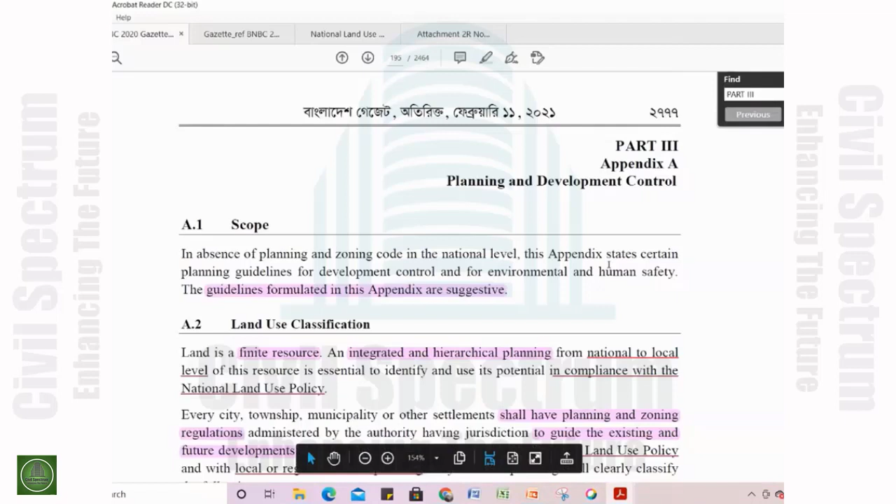So let's go for the discussion of each of the sections in detail. This is Part 3, Appendix A of BNBC 2020. We will be discussing planning and development control.

So the scope at the very beginning defines that there should have been a planning and zoning code. Since it is not there, in the absence of the planning and zoning code at national level, this appendix states certain planning guidelines for development control and for environment and human safety.

The guidelines formulated in this appendix are suggestive. So this is the building code, not a planning code.

If there had been a planning code here, probably this part would have been covered by the planning code. In absence of that, the BNBC suggests certain guidelines here.

So now about the land use classification. There are a few statements that are very important for a country like Bangladesh. It's quite a populous country with limited resources. So land is one of the resources, and at the very beginning we declared that this is a finite resource. So an integrated and hierarchical planning from national to local level of this resource is essential to identify and use its potential in compliance with the national land use policy.

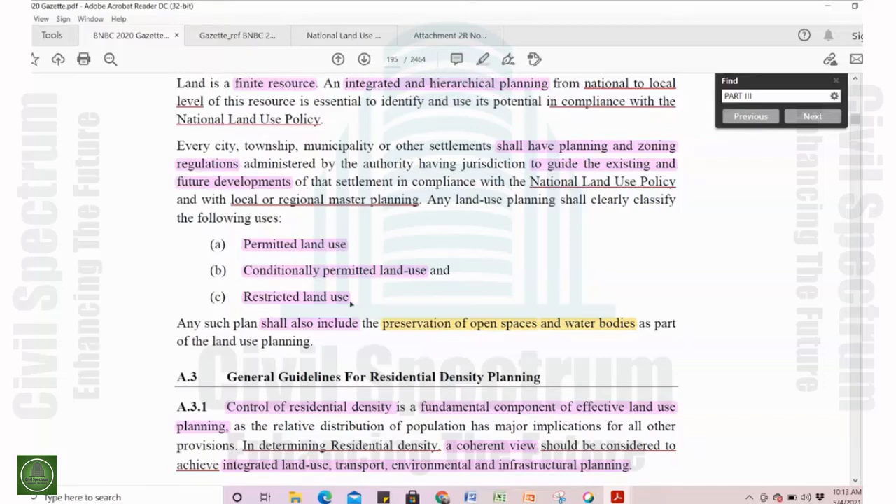But all these land use planning shall clearly classify the following uses. So there are three types of uses which are required to be mentioned in the planning guidelines. One is permitted land use, the second one is conditionally permitted land use, and the third one is restricted land use. But that's not all.

Any such plan shall also include the preservation of open space and water bodies. So this is an additional criteria that must be met in any land use planning. So this is the basic part of land use classification.

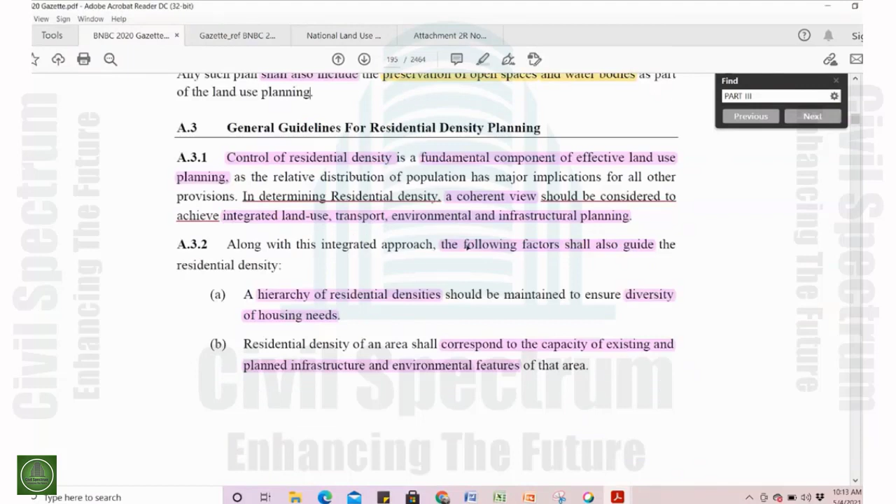Then we go for the general guidelines for residential density planning. Control of residential density is a fundamental component of effective land use, because the relative distribution of population has major implication for all other provisions. So in determining residential density, a coherent view should be considered to achieve integrated land use, transport, environmental and infrastructure planning.

So there must be an integrated approach which will create a balance between transport, environment, infrastructure planning, and residential densities. Along with this integrated approach, the following factors shall also guide the residential density.

A hierarchy of residential densities should be maintained to ensure diversity of housing needs. I have highlighted a few words just to focus our points actually, that we need diversity of housing needs, and to ensure that, we need to distribute residential densities in hierarchies. So these two factors have been highlighted here.

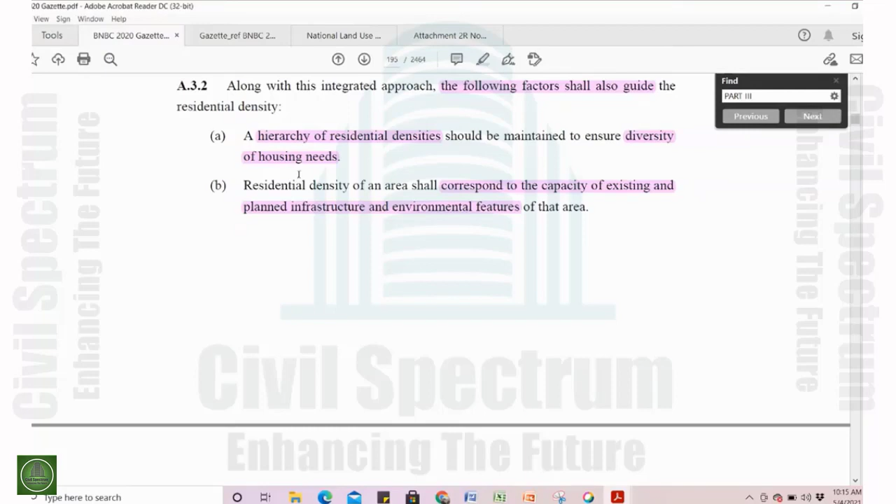Likewise, B: residential density of an area shall correspond to the capacity of existing and planned infrastructure and environmental features. So there are two issues: one is existing and planned infrastructure, and the environmental features of a locality. So residential density shall correspond to that.

C: densities should be planned in such a way that encourages public transport and reduces travel demands. These are basic guidelines for all residential densities.

For large cities, higher densities around stations and interchanges of rail-based public transport systems may be encouraged to reduce reliance on road-based public transport systems. Since higher density residential development near high capacity transport systems creates pressure on urban land use planning, careful environmental planning with definitive environmental objectives shall be there for such instances.

To protect environmentally sensitive areas and areas of historical importance, low density residential development should be proposed where and as necessary. So there is an indication of density distribution: where the higher densities will be and where the lower densities will be.

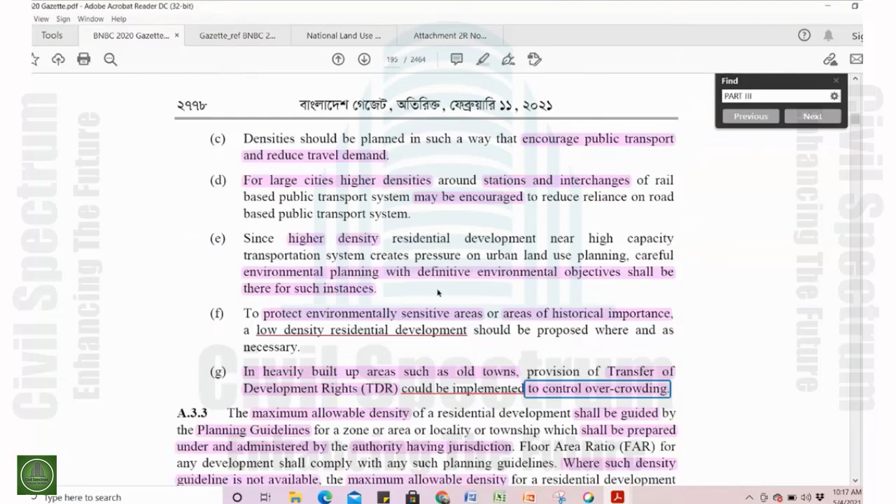In heavily built up areas such as old towns, provisions of transfer of development rights (TDR) could be implemented to control overcrowding. So these are the general guidelines for distributing residential densities, and there is just another guideline for it.

The maximum allowable density of a residential development shall be guided by the planning guidelines for a zone or area or locality or township, which shall be prepared under and administered by the authority having jurisdiction. So actually it is the authority having jurisdiction who will decide what will be the maximum allowable density for a locality, zone, area or township.

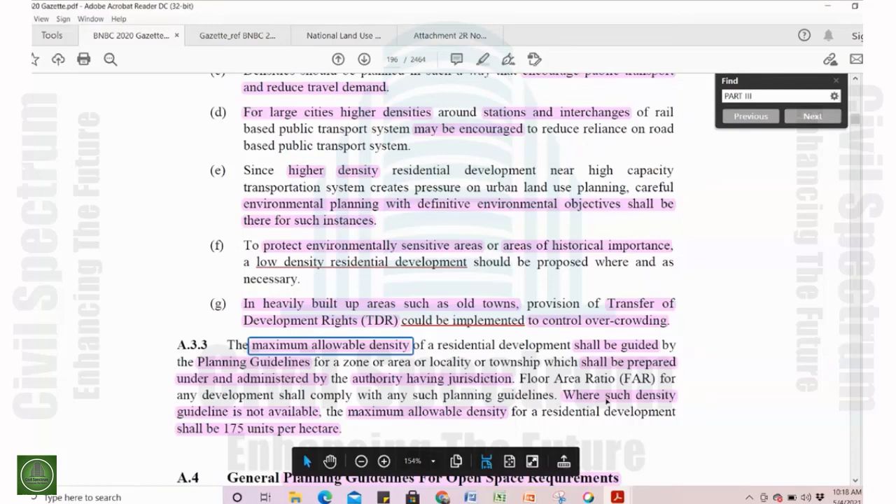Floor area ratio (FAR) for any development shall comply with any such planning guidelines. Where such density guidelines are not available, maximum allowable density for a residential development shall be 175 units per hectare. So there is a baseline: if we don't have any other guideline present for referring to that development, we will consider this density guideline as a reference for our development.

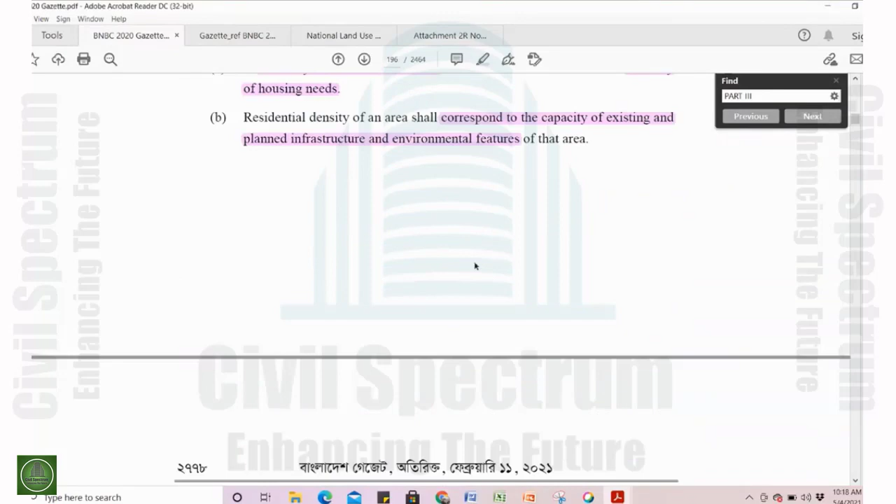As we all know, these are the density distribution guidelines for residential densities. Now comes the open space guidelines, general guidelines for planning open spaces. I think the whole paragraph makes sense, so I'll go line by line for this part.

In a high density context like ours, pressure on land is extreme. Preserving open spaces and maintaining environmental balance becomes a priority in this context. In any planning process, open space must be planned as a land use in its own right.

Although apparently open space is not a kind of dedicated, defined land use, it is stated here that open space must be planned as a land use, and not as the remainder after providing for other land uses. So it has to be a focus of the planner while planning the settlement, an area, or a master plan.

The hierarchy of recreational open spaces in planning settlements may be as following. So there are three types of open spaces: local open space, ward open space, and regional open space.

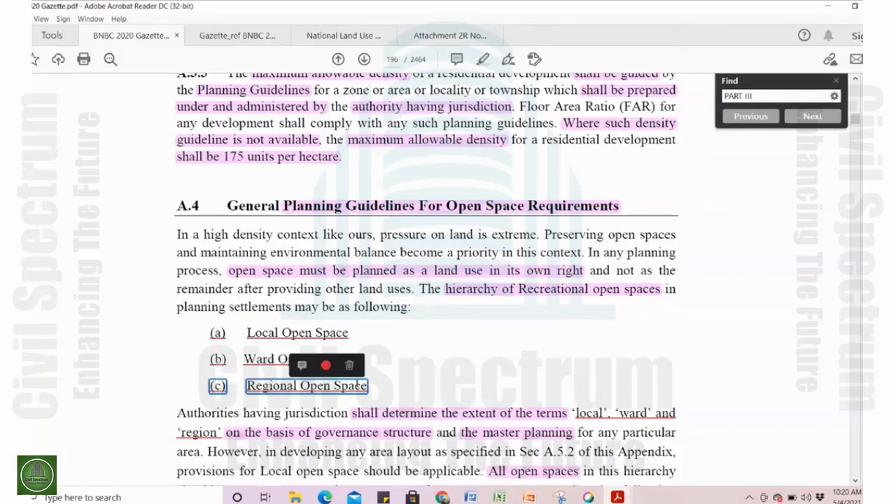Authorities having jurisdiction shall determine the extent of the terms local, ward, and region. So these are a bit flexible. The authority will define which area should be designated as local, ward, or region, but it is not totally free—they will do it on the basis of governance structure and master planning for any particular area. So there are references on the basis of which they define the extent of a locality, ward, and region.

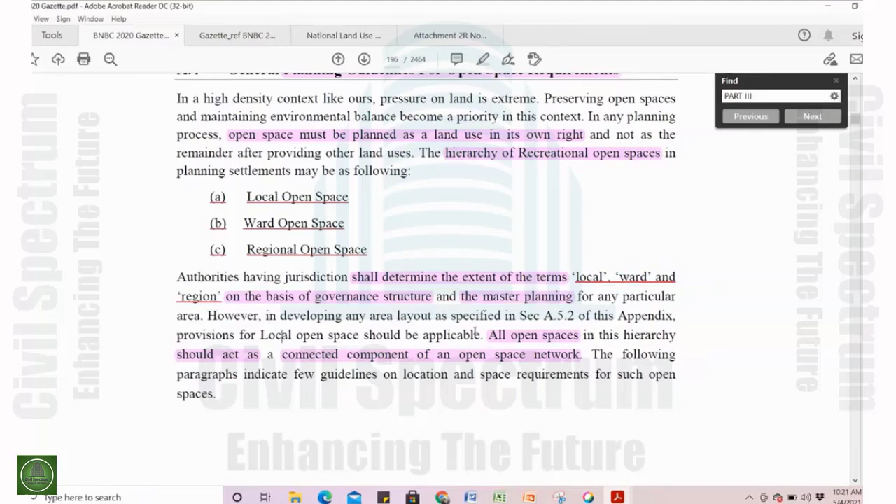All open spaces in this hierarchy should act as a connected component of an open space network. So they are not independent and disjointed; they must be planned in a way so that they are also part of an open space network. That is another guideline for open space requirements.

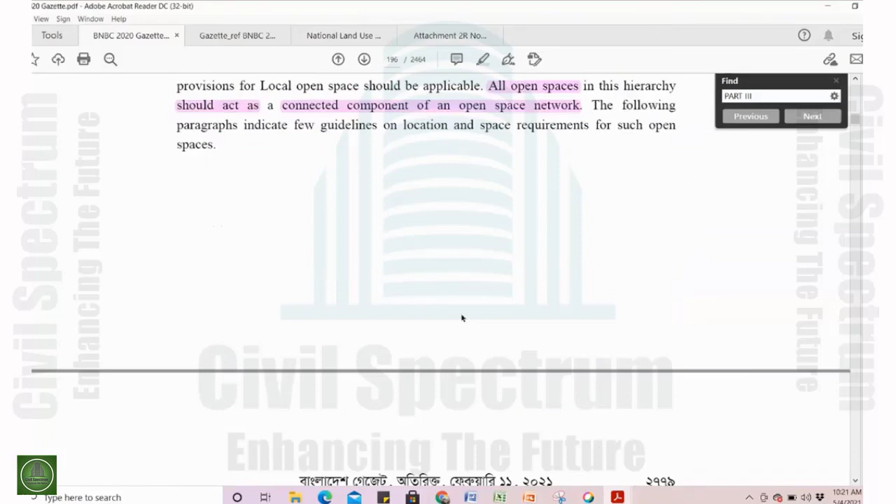So let's go into detail for each of the open spaces. For local open space, every locality should have local open space, which is required to meet primarily the passive recreational needs like outdoor sitting, jogging, walking tracks, playgrounds for children, etc. These are all passive recreational needs of the population.

Such spaces should be located either within the residential neighborhood or somewhere centrally to serve a wider area of more than one neighborhood. So we can understand they are relatively smaller in scale, located within the locality, and there are a few guidelines about the space requirements here.

Considering the projected future population of a locality—we must notice it is the projected future population, not the existing population—a minimum requirement of 1 square meter of local open space per locality occupant should be allotted.

So this is the basic guideline for a new development. This has to be followed, but where it is already a built-up situation, if possible, such open spaces should be at least 500 square meters. So even in newer localities, it can be a parcel of 500 square meters, or multiple parcels of 500 square meters. It is suggested that it should be at least 500 square meters or more.

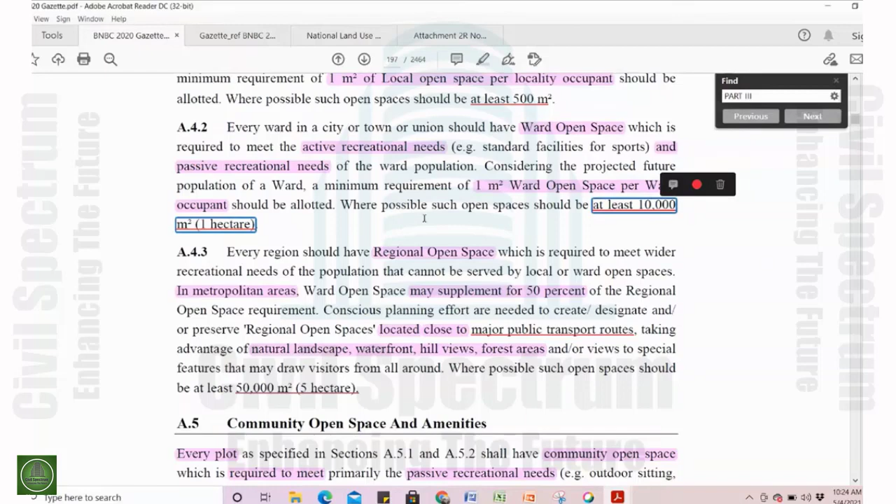It is 1 square meter of ward open space per ward occupant, and the minimum size here is 10,000 square meters, or 1 hectare—that is the minimum size for ward open space.

And for regional open space, every region should have regional open space, which is required to meet wider recreational needs of the population that cannot be served by local or ward open spaces. In metropolitan areas, ward open spaces may supplement 50% of the regional open space requirement. So it is a flexibility and exception that in metropolitan areas, ward open space and regional open space may overlap.

They can supplement each other.

Conscious planning efforts are needed to create, designate, and preserve regional open spaces located close to major public transport routes, so that the majority of the population can have good access to regional open spaces. These spaces should take advantage of natural landscape, waterfront, hill view, forest areas, or views to special features that may draw visitors from all around.

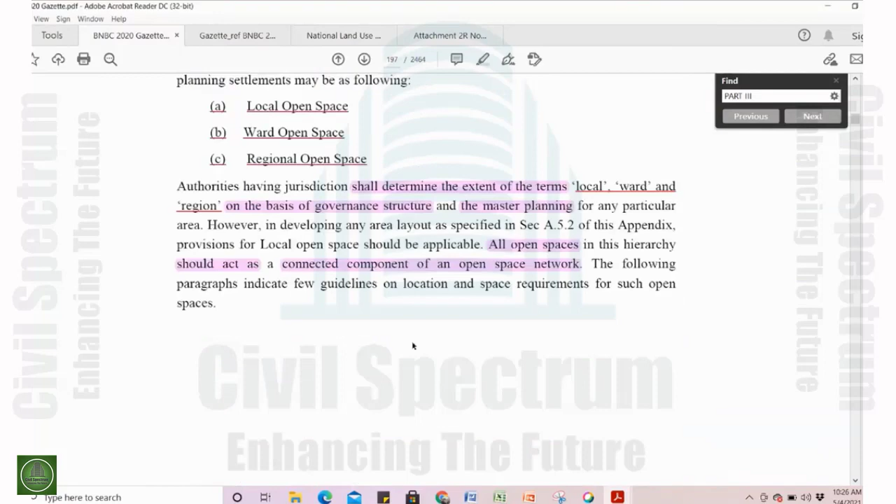They also serve recreational purposes of a different kind, not served by the local open space or ward open space. Where possible, such open spaces should be at least 50,000 square meters, or 5 hectares. This is the minimum size, of course, so it can be much larger. These are the 3 types of open spaces which should be placed in a hierarchy for a larger planning scenario.

Now comes the open space criteria within a plot: community open space and amenities. Every plot, as specified in sections A5.1 and A5.2, shall have community open spaces required to meet primarily the passive recreational needs - outdoor sitting, jogging, walking tracks, playgrounds for children. Such spaces shall be located within the plot boundary. This is about each individual plot development. Considering the types of development, the following minimum requirements of community open space and amenities shall be applicable as per guidelines of these sections.

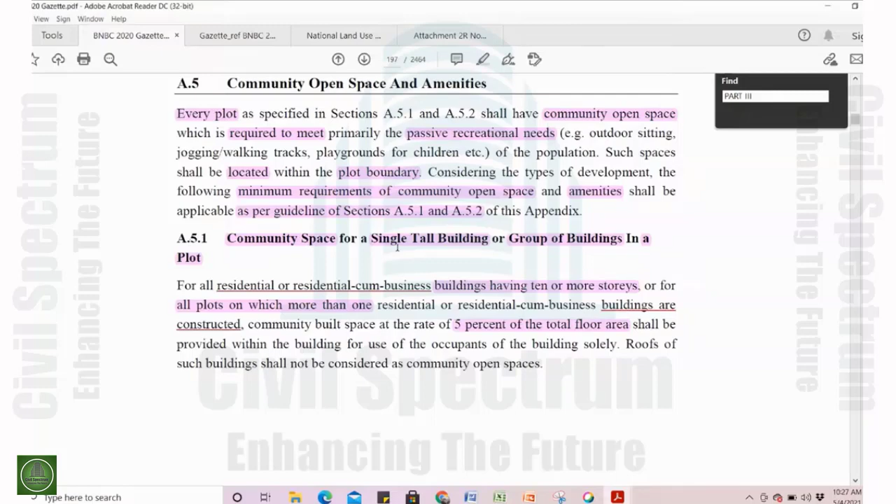Let's go through the sections. A.5.1: community space for a single tall building or group of buildings in a plot. For all residential or residential-cum-business buildings having 10 or more stories, or for all plots on which more than one residential or residential-cum-business building is constructed, community built space at the rate of 5% of the total floor area shall be provided within the building for use of the occupants of the building solely. Roofs of such buildings shall not be considered as community open space.

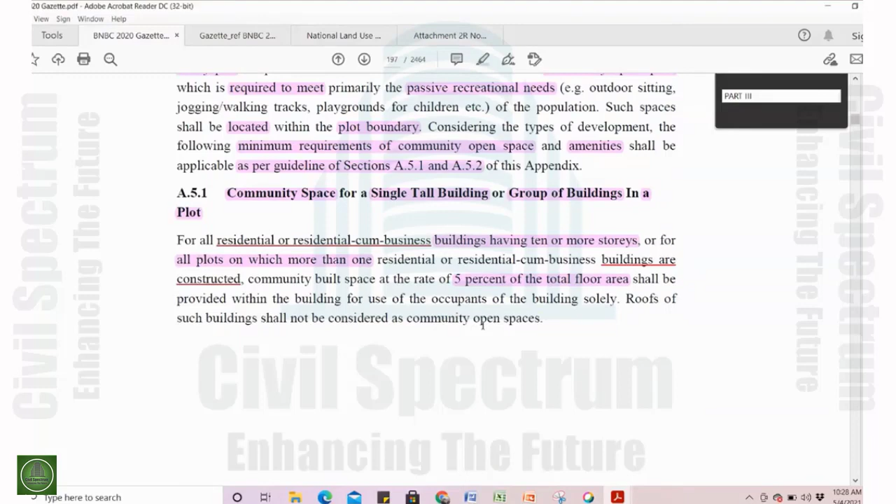So this is mostly focusing on a plot and tall building, or relatively higher density development or mixed use development. That is the guideline for the community open space for such developments.

For residential or residential-cum-business plots measuring more than 0.1 hectare - these are relatively larger plots - 10% of the area of land or 1 square meter per occupant of the plot, whichever is larger, shall be left vacant for use as a children's playground. This playground shall be contiguous and shall have a length not exceeding 2.5 times its width. The playground may extend into the mandatory open space of the lot.

So relatively larger plots will have a different guideline for community open space, guided by two criteria: 10% of the area of the land, or 1 square meter per occupant, whichever is larger, will be needed for community open space. This particular open space can overlap with the mandatory open space or setback areas.

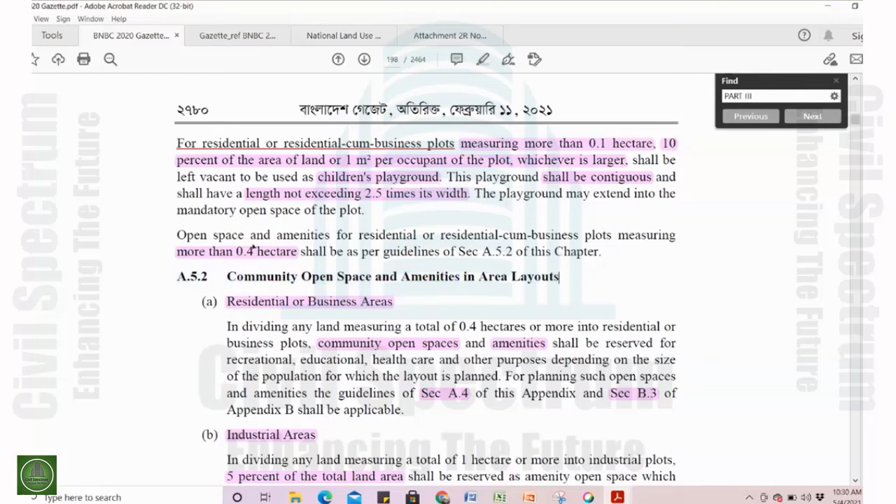Open space and amenities for residential-cum-business plots measuring more than 0.4 hectares - so this is about much larger plots. This was more than 0.1 hectare but less than 0.4 hectare, it is implied. Where the plot size is much larger, it shall be as per guideline of section A.5.2. This is the next section that guides what will happen to plots more than 0.4 hectare.

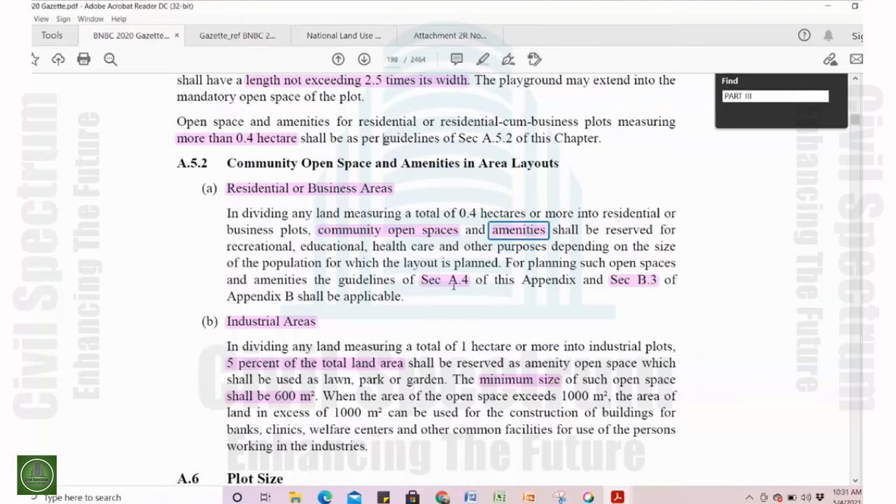For residential or business areas, in dividing any land measuring a total of 0.4 hectares or more into residential or business plots, community open spaces and amenities shall be reserved for recreational, educational, healthcare and other purposes depending on the size of the population for which the layout is planned. For planning such open spaces and amenities, there are guidelines that must be followed.

For industrial areas, 5% of the total land shall be reserved as amenity open space. The minimum size of such open spaces shall be 600 square meters. Where the area of the open space exceeds 1000 square meters, the area of land in excess of 1000 square meters can be used for the construction of buildings for banks, clinics, welfare centers and other common facilities.

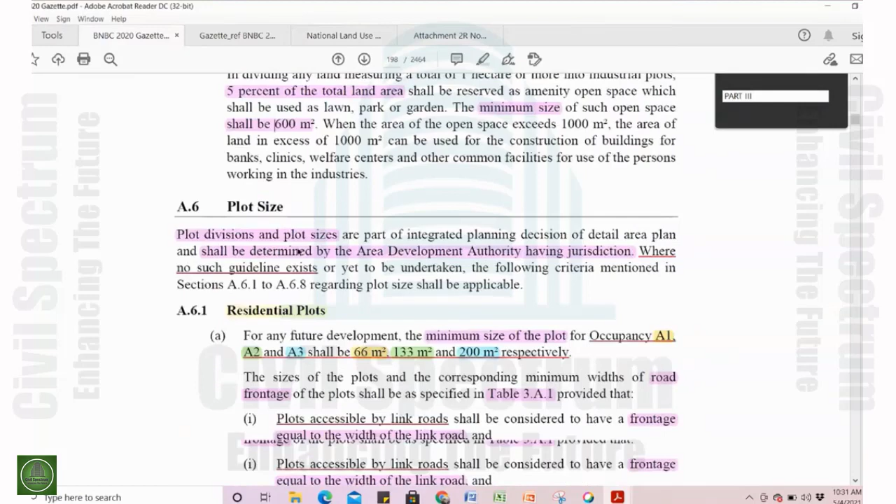So there are two separate guidelines for larger plots - one for residential and business situations and the other for industrial situations. That ends the planning part.

Now we are going to individual plot size. Plot divisions and plot sizes are part of integrated planning decisions and shall be determined by the area development authority having jurisdiction. Where no such guidelines exist or are yet to be undertaken, the following criteria mentioned in sections A6.1 to A6.8 regarding plot sizes shall be applicable.

So about the residential plots - A1 relates to 66 square meters, A2 is 133 square meters, and A3 is 200 square meters. This is the minimum size of the plot, respectively. And they also have to have some road frontage.

Can you see the presentation? I think there are some glitches here. Okay, I'll just stop the screen share for a moment and we'll come back quickly. Well, I think it should be okay by now. So this is, yeah.

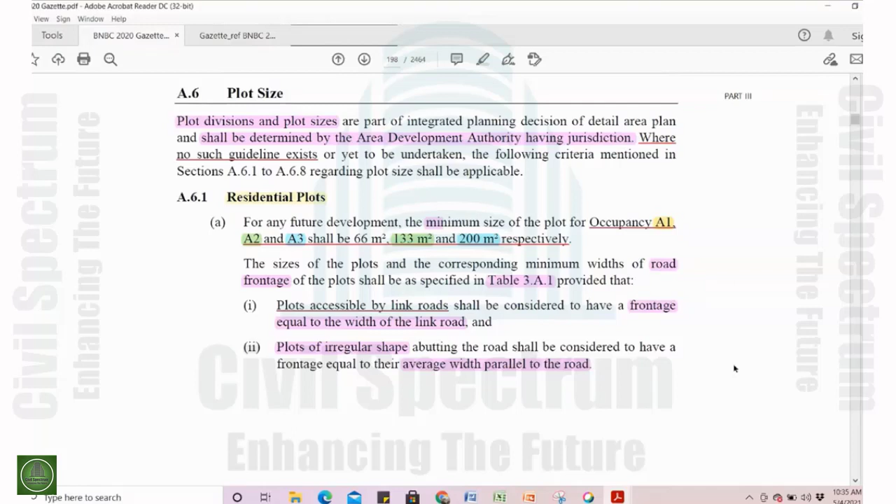So these are the three occupancy types and their respective plot areas, which are to be abided by. For road frontages, we have to consult table 3.A.1. It is provided there for different plot sizes. We'll go through it, it is just below.

So there are a few additional criteria. Plots accessible by link roads shall be considered to have a frontage equal to the width of the link road. Plots of irregular shape abutting the road shall be considered to have a frontage equal to their average width parallel to the road.

The other criteria are that limitations of plot sizes and frontages imposed in A6.1 above may be waived for the approved affordable housing, including site and service scheme. So this is an exemption for approved affordable housing and site and service scheme. The limitation of plot size and frontages may be waived, but there are other guidelines that will decide how much waiver they will get, and that is given in Appendix B.

The minimum size of the plot for a group housing development scheme and other special requirements for group housing developments shall be as specified or approved by the respective city development authority.

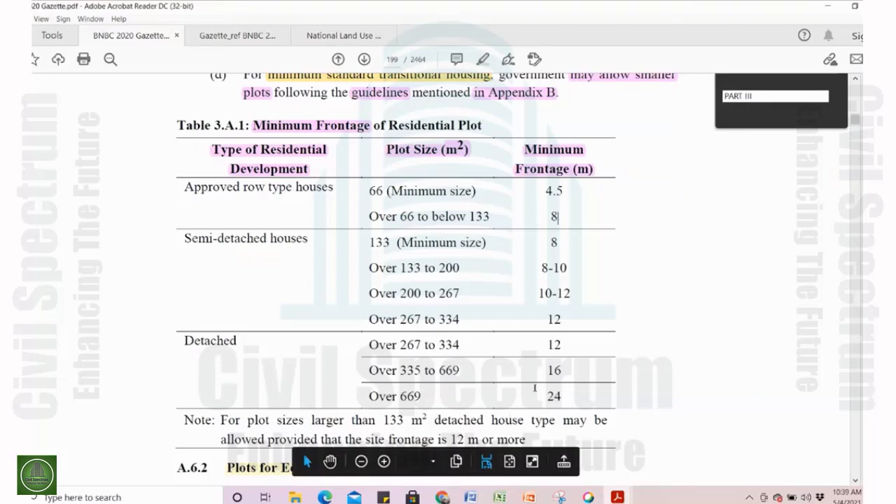So let's look at the table right now. It says about the minimum frontage of residential plot. There are three types of residential development: approved row type, semi-detached type, and detached type. There are plot sizes defined for that. Minimum plot size should be 66 square meter, and this particular typology is approved up to 133 square meter, and the required road frontages are 4.5 meter and 8 meter. So this is the basic structure, and it is given for other typologies as well.

We are not going into detail, we should just look at the footnote. Here is the flexibility. As you can see, for semi-detached house there is a minimum size, for approved row house there is a minimum size, but for detached house it is not mentioned whether it is a minimum size or not. So there is a note about it here: for plot size larger than 133 square meter, detached housing type may be allowed, provided that the site frontage is 12 meter or more.

So if the site frontage is 12 meter or more, detached housing type may be allowed for even 133 square meter or more, larger than 133 square meter plots.

So that was applicable for residential buildings. Now plots for educational buildings: minimum size of the plot for educational buildings will be based on occupant's capacity and shall be at the rate of 4 square meter per pupil or occupant. The minimum plot size shall be 3,950 square meter. Further elaboration is given in Appendix B.

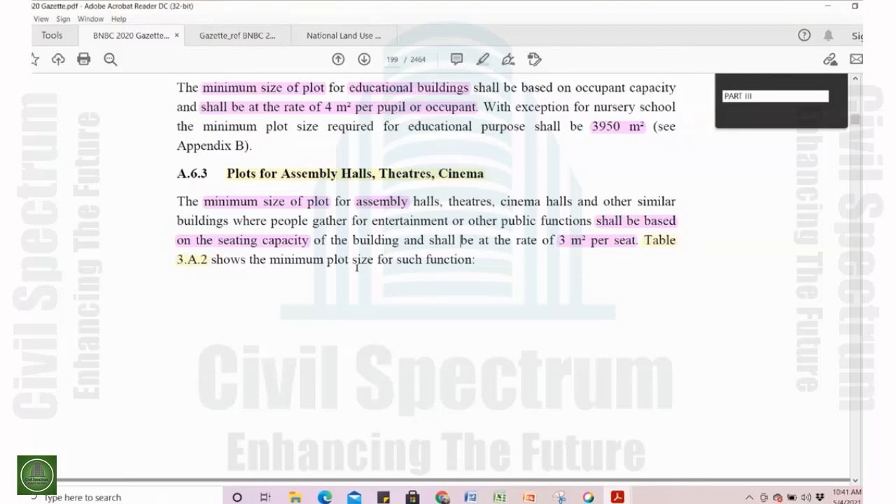Plot for assembly halls, theatre and cinemas: minimum size of plot for assembly halls, theatre, cinema halls and other similar buildings where people will gather for entertainment or public functions shall be based on the seating capacity of the building, and shall be at the rate of 3 square meter per seat. There is a table below, table 3.A.2, that gives some more elaboration on this topic.

For community centers in rural or urban areas, the minimum size of the plot will be 1,300 square meter. For business and mercantile plots, the minimum size will be 200 square meter with a road frontage of not less than 10 meters.

So 2 criteria are applicable for business and mercantile plots. One is the road frontage, that should not be less than 10 meter, and the minimum size of the plot will be 200 square meter.

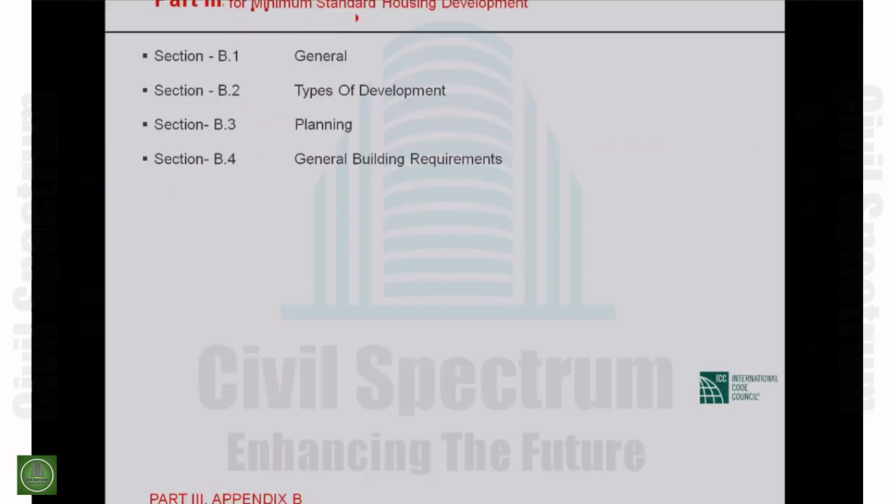In detail, actually, the main content of B1 will be defining the minimum standard housing, and its two typologies. One is standard community, minimum standard community housing, and the other one is minimum standard transitional housing. And then it will discuss on requirements of community facilities and dwelling classifications. So that is the kind of orientation that will be given by the general part.

Then the section B2 that deals with type of development, it discusses with 5 types of development. One is single unit plots of row type housing, multi-storied flats of row type housing, block development as a group development, group housing, cluster housing, and site and service scheme. So that is the types of development.

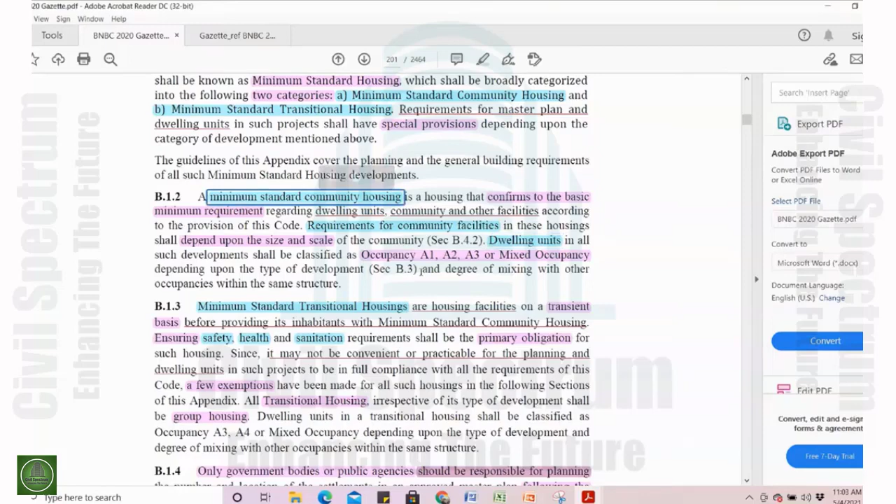The minimum standard transitional housings are housing facilities on a transient basis. This is important, that they are not permanent housing. So these are housing on a transient basis, before providing its inhabitants with minimum standard community housing. So they will be given minimum standard community housing, but before that there is a kind of transitional phase which is done by the transitional housing.

What is the objective of this particular housing? The primary obligation of this transitional housing will be to ensure safety, health, and sanitation. So these are the primary obligations of a transitional housing, and they must be met.

Since it may not be convenient or practicable for the planning and dwelling units in such projects to be in full compliance with all requirements of the code, a few exemptions have been made for all such housings in the following sections of the appendix. All transitional housings, irrespective of their type of development, shall be group housing - these are not independent houses, they must be considered as group housing.

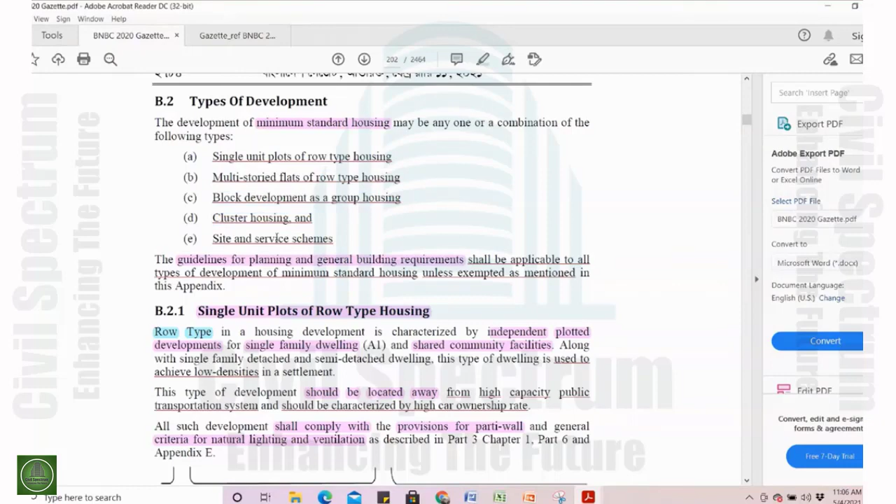So what are these housing typologies? The typologies for minimum standard housing are as follows: single unit plots of row type housing, multi-storied flats of row type housing, block development as group housing, cluster housing, and site and service scheme. The guidelines for planning and general building requirements shall be applicable to all types of development of minimum standard housing unless exempted as mentioned in this appendix. So there are few exemptions somewhere, but otherwise the basic guidelines will remain the same for all housing types.

Now the elaboration of each type. Single unit plots of row type housing - row type housing is a housing development characterized by independent plotted development, plot based, for single family dwelling A1 and shared community facilities. So it is a plotted development for single families who share their community facilities, along with single family detached and single family semi-detached dwellings. This type of dwelling is used to achieve low densities in a settlement, so these are the low density development tools for housing.

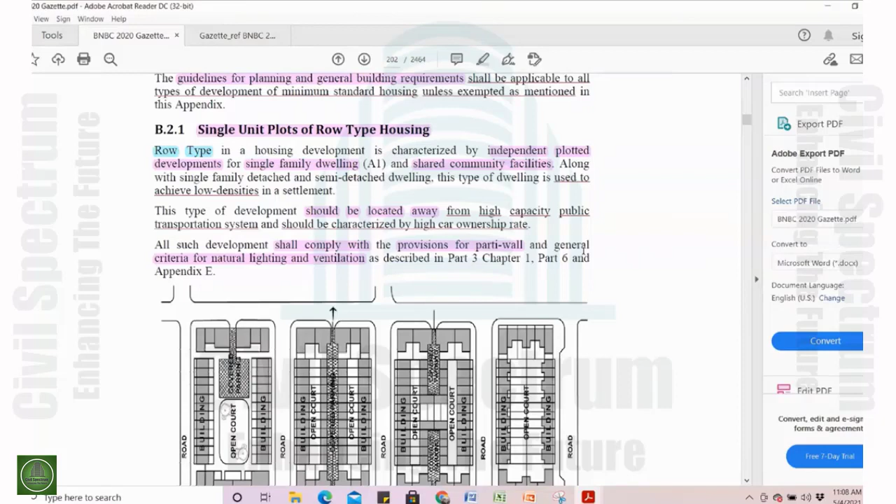This single unit plots of row type housing. This type of development should be located away from high capacity public transportation systems and should be characterized by high car ownership rate. As it is a relatively low density development, there is a locational suggestion that it should be located away from high capacity public transportation systems and will better be served by high car ownership, so that people will have individual mobility. Of course there will be other public transportation systems, but not high capacity ones. So all such developments shall comply with the provisions for party wall, a new term for us.

We will go through it in a later phase. The party wall will be discussed in further elaboration, along with general criteria for natural lighting and ventilation. Since it deals with shared wall situations, called party wall, there will be additional care for party walls and for ensuring natural lighting and ventilation as described in this code. So there are a few references: part 3 chapter 1, part 6 appendix E. They all deal with construction and natural lighting and ventilation. Those guidelines will be complied with.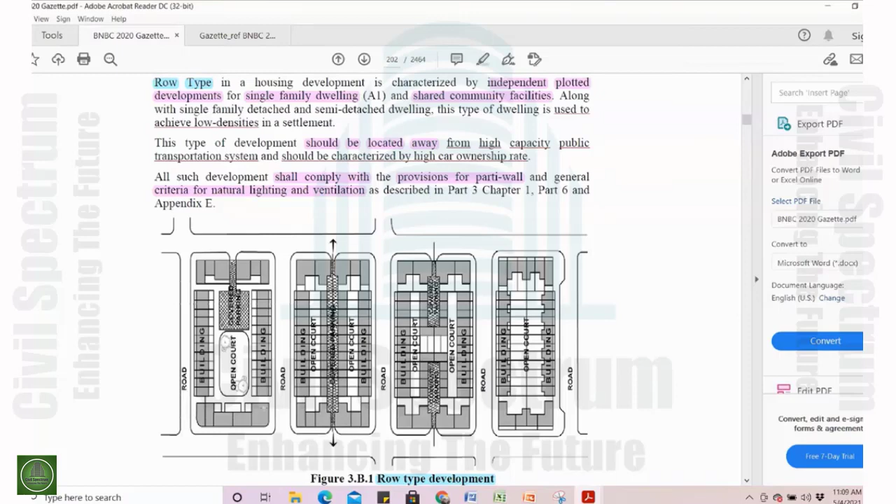So this is the general outline for row type development. There are three areas, mainly the built area. The white area is open spaces and the hatch area is for parking situations. So there might be many possible alternatives for this typology. This is just a suggestive outline.

For multi-storied flats of row house type, but they are not plotted developments like the previous one. Here the undemarcated, undivided land is shared by the flat owners within the complex. So this is a different type of development, another row type development, but multi-storied, and it is on shared, undivided, undemarcated land.

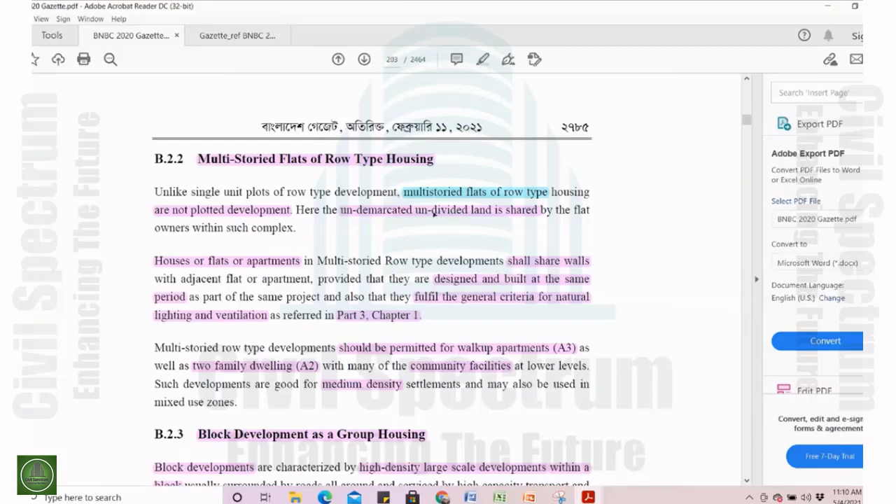Houses or flats or apartments in multi-storied row type development shall share walls with adjacent flats or apartments, provided that they are designed and built at the same period as part of the same project, and also that they fulfill the general criteria of natural lighting and ventilation.

Multi-storied row type development should be permitted for walk-up apartments A3 as well as two-family dwellings A2, with many of the community facilities at lower levels. Such developments are good for medium density. The first one was good for lower density; this will have a little bit more density, medium density.

Block development as a group housing. Block developments are characterized by high density, large scale development. So at the very beginning, it deals with high density within a block, usually surrounded by roads all around and serviced by high capacity transport and utility networks. Since it will have high density, it has to be located in a position where high capacity utility and transport networks are available.

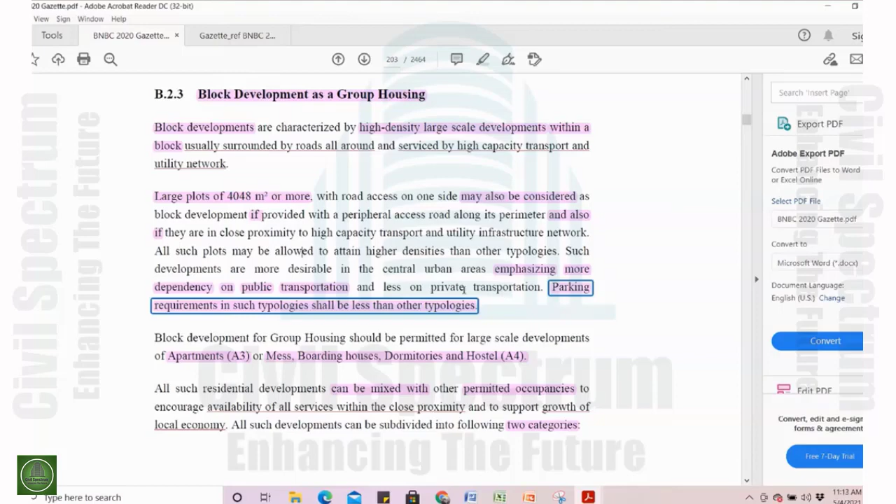All such plots may be allowed to attain higher densities than other typologies. Such developments are more desirable in central urban areas, emphasizing more dependency on public transportation and less on private transportation. Parking requirements in such typologies shall be less than other typologies. So it is just the opposite of row type development—it will depend more on public transportation and have less private transportation or individual mobility, more of a mass or collective mobility.

Block development for group housing should be permitted for large scale developments of apartments A3 and mess and boarding houses, dormitories and hostels A4. So two typologies are allotted here. Residential developments, all such residential developments can be mixed with other permitted occupancies. So a mixed use is suggested here, to encourage availability of all services within closer proximity and also to support growth of the local economy.

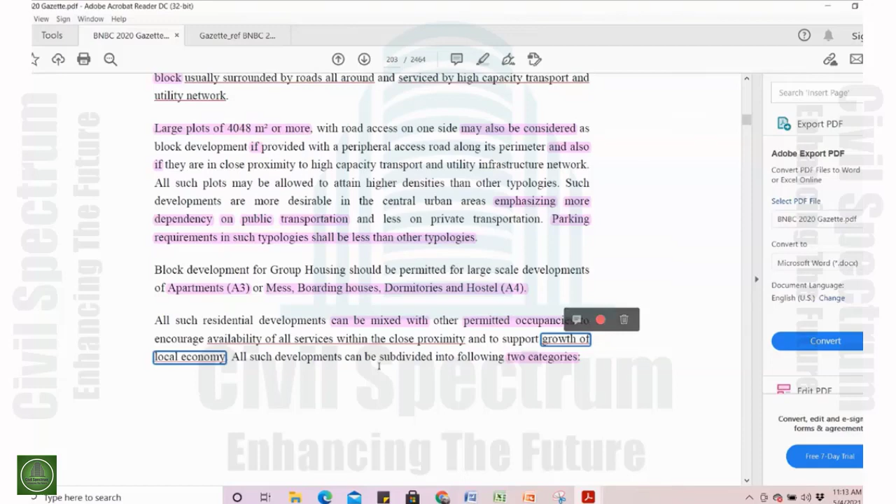So there are two objectives for using this mixed pattern. All such developments can be subdivided into two categories: tower block development for group housing, and perimeter block development for group housing. As is evident from the titles, the tower block includes flats or apartments A3 in a single or multiple high-rise towers within a block.

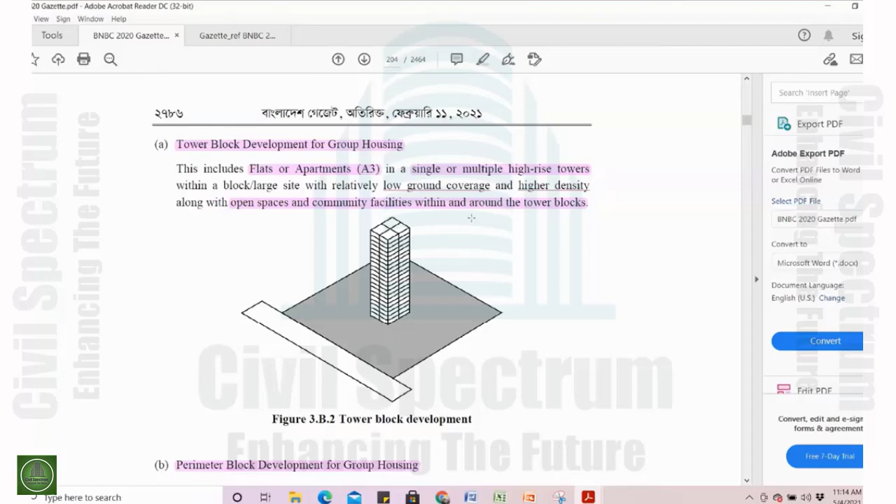Or a large site with relatively low ground coverage and higher density, along with open spaces and community facilities within and around the tower blocks. So what is perimeter block development? Unlike tower blocks, perimeter block developments involve one single building or multiple buildings placed along the perimeter of the site to create an internal open space shielded from the surrounding, commonly used as a community space.

Each housing unit in such developments shall have at least two sides open, one at the internal open space, the other at the external road side. Depending upon the plot size and population, such development may also be permitted to become high-rise, provided that the internal open space conforms to the minimum requirements of a courtyard. So there are guidelines for courtyards in part 3 chapter 1. If it conforms to that, this typology can become taller.

So this is the block development. Now comes the cluster type.

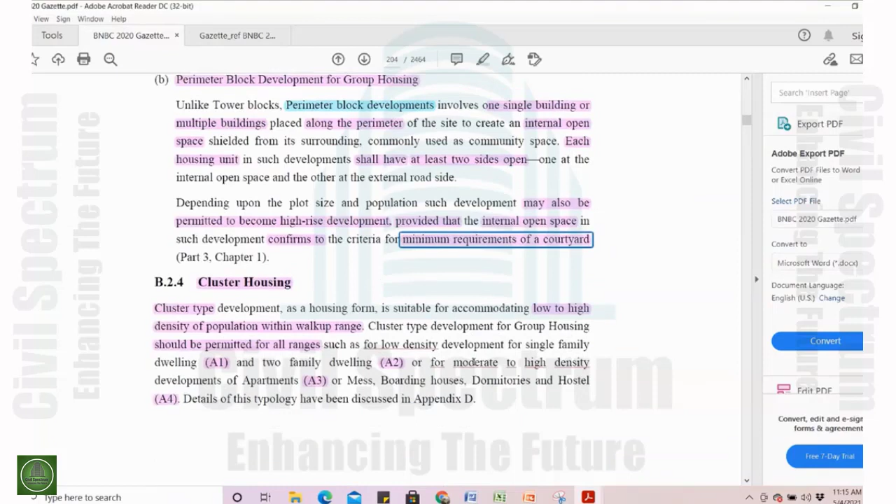The cluster type development is very much suitable for accommodating low to high density of population within walkup range. Cluster type development for group housing should be permitted for all ranges, A1, A2, A3, A4. Details of this typology have been discussed in Appendix D.

There will be another appendix for detailing out the cluster housing. We'll go there and have a more detailed understanding of cluster housing later on.

Finally, the site and service schemes. Site and service schemes shall delineate individual plots and provide for the infrastructural needs for development of permanent housing. Interim constructions by the allottees should also be permitted. Skeletal structures for a roof on column, or developed plinths, may be provided if funds are available. So this is the general description of a site and service scheme.

Sanitation and water supply must be provided, so this is a priority. The sanitation and water supply infrastructure is a must for site and service scheme, even prior to the building components.

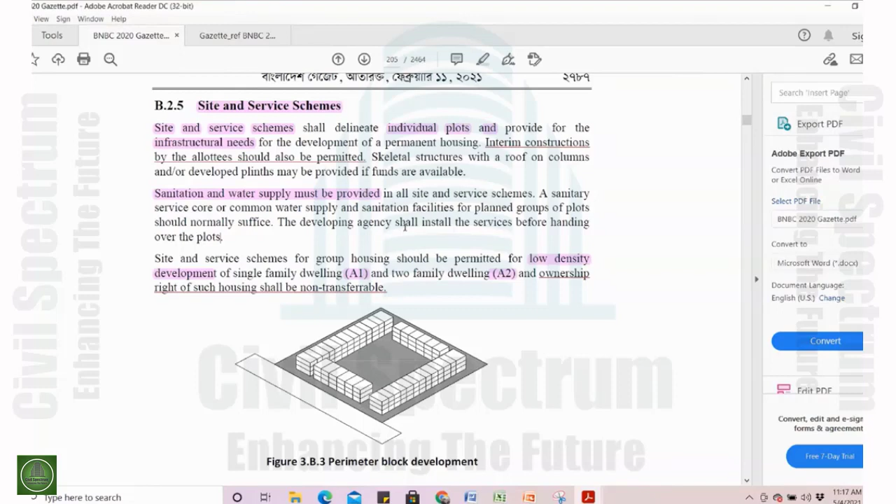A sanitary service core, or common water supply and sanitation facilities for planned groups of plots, should normally suffice. The developing agency shall install the service before handing over the plots. So that is a condition that must be met, that the owner will receive the plots with the services.

Site and service scheme for group housing should be permitted for low density development of single family housing and two family housing, and ownership rights of such housing shall be non-transferable. So there is an extra criteria for ownership here.

These are the diagrams for different types of developments. That is for perimeter block development, units placed along the perimeter, creating a central open space, units having two sides open and the other side shared. One is the internal side and the external side.

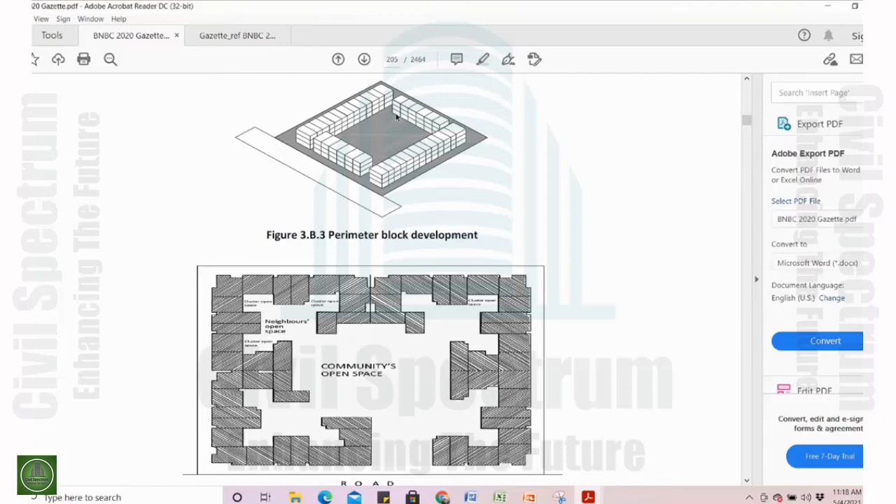Cluster type development will be organized in clusters with different spaces in between. So that is the cluster type development.

So now comes the planning part. A minimum standard housing shall ensure quality living. Actually, the main target is to make a comprehensive planning, and this comprehensive planning must ensure the environmental quality, social and utility infrastructure, educational facilities, healthcare, recreational facilities, connectivity to commerce, and job locations. It has to be a very comprehensive planning for such minimum standard housing.

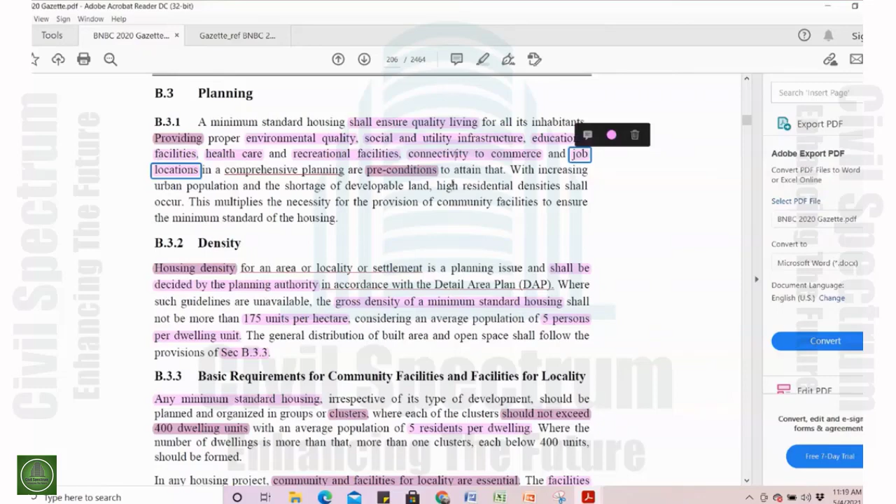About the density, housing density shall be decided by the authority for such developments in accordance to the detailed area plan, if they have one. Where such guidelines are unavailable, gross density of a minimum standard housing will not be more than 175 units per hectare. So if the detailed area plan suggests something else, it will be followed through, but if there are no such guidelines, it will be 175 units per hectare, considering an average population of 5 persons per dwelling unit.

And a general distribution of built area and open space guidelines are given in section B.3.3. This is section B.3.3, basic requirements for community facilities and facilities for locality.

Any minimum standard housing, irrespective of its type of development, should be planned and organized in groups or clusters, where each of the clusters should not exceed 400 units. So there is a limit: a 400 dwelling unit maximum in a group or cluster, with the same population per unit, five persons per unit.

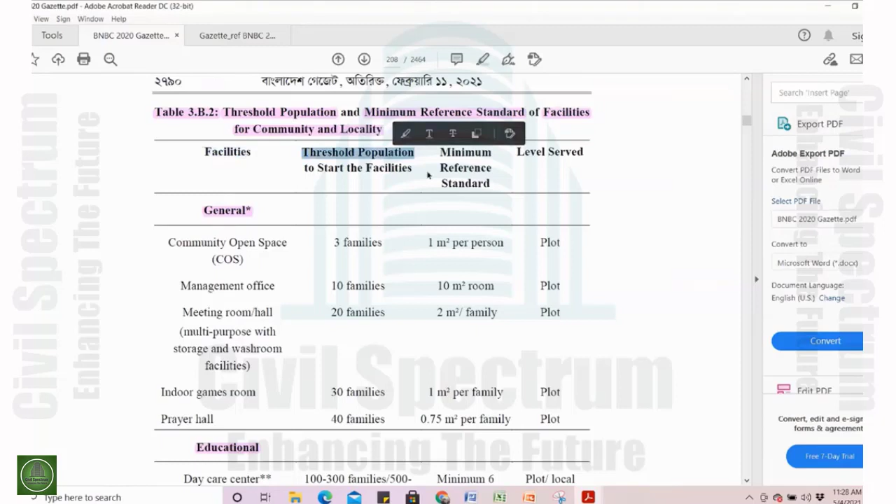Table 3.B.2, there are 4 components. One is the facility, the other is the threshold population to start the facility, the third one is minimum reference standard, and the fourth is level served.

And it has some broad headings like general. There are few general components, few educational components, some commercial components, some socio-cultural components, healthcare components, and service and utilities components. There are more actually - sports and recreational components. So these are the components, and there are other subcomponents under it.

And we can see that there are a few asterisks used here and there in this reference. So let's go through it first, what these asterisks refer to.

A single asterisk refers to: all general facilities shall be accommodated within the plot, block, or cluster area. For any housing having a population of 10 families or above, such facility shall not be less than 1 square meter per person. So asterisk 1 implies general facilities and a particular population size.

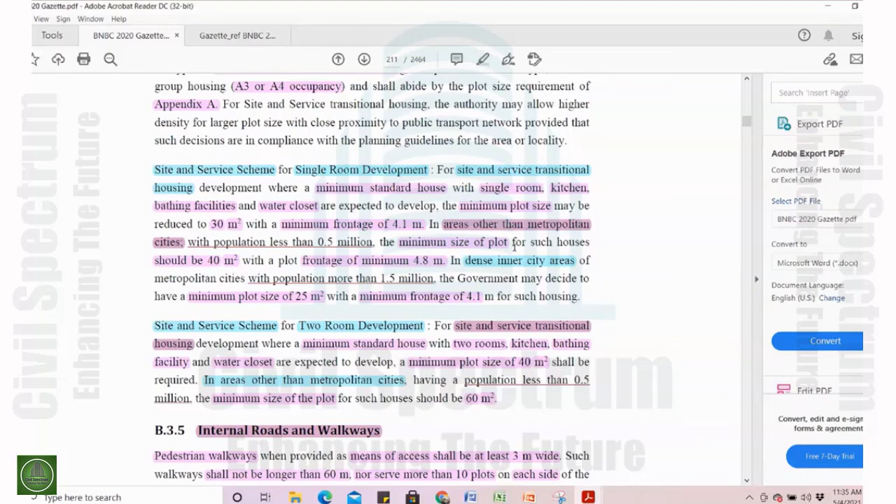So there are a few alternatives here depending upon the area population, that is metropolitan inner city, or general metropolitan city, or out of the metropolitan cities. There are three options for different plot sizes and frontages.

For site and service scheme for 2-room developments, the minimum standard house with 2 rooms, kitchen, bathing facility, and water closet are expected to develop here. The minimum plot size will be 40 square meters. In areas other than metropolitan cities having a population less than 0.5 million, the minimum size of the plot shall be 60 square meters. So the frontage of minimum 4.1 meters stands also here, but the plot size varies.

Now, the internal roads and walkways. Pedestrian walkways, when provided as means of access, shall be at least 3 meters wide. So there is a guideline for pedestrian walkways, it has to be 3 meters wide when it is a means of access. Such walkways shall not be longer than 60 meters nor serve more than 10 plots on each side of the path. Other internal roads shall be at least 6 meters wide to allow emergency vehicles to enter. The paved portion of such roads, if used for pedestrian movement only, should be at least 2 meters wide. So that is about the size of the plot and the connectivities.

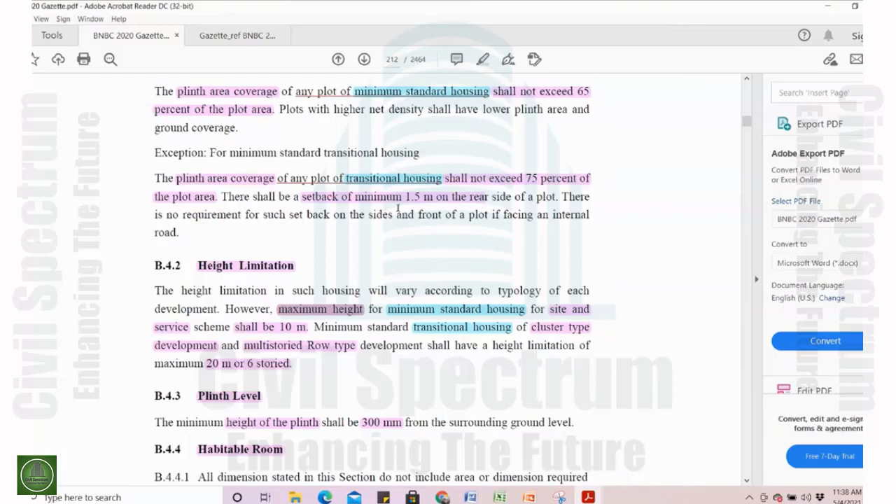This is an exception: the height limitation. Height limitation in such housing will vary according to typology of each development. However, maximum height for minimum standard housing for site and service scheme shall be 10 meters. Minimum standard transitional housing of cluster type development and multi-story row type development shall have a height limitation of maximum 20 meter or 6 storied.

Plinth level: the minimum height of the plinth shall be 300 millimeter from the surrounding ground level.

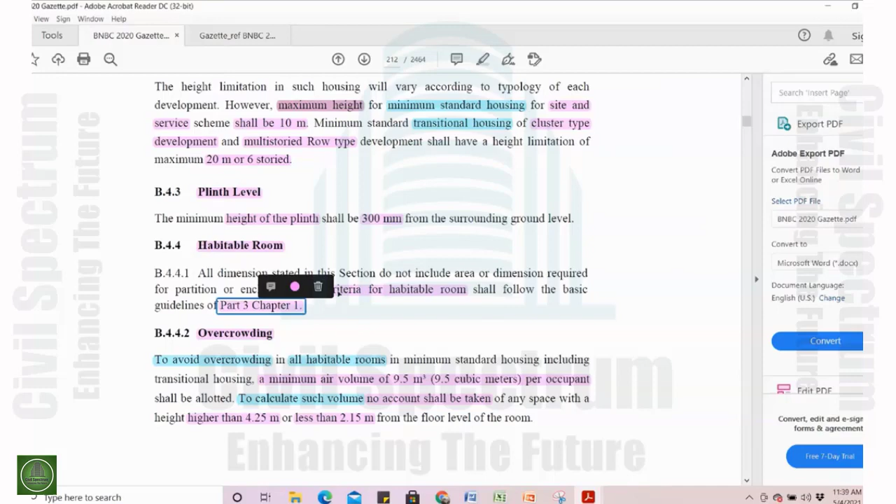Habitable room: all dimensions stated in this section do not include area or dimension required for partition or enclosure wall. Criteria for habitable room shall follow the basic guidelines of Part 3, Chapter 1. So it is equal to any other housing, similar to any other housing.

Overcrowding: to avoid overcrowding in all habitable rooms in minimum standard housing including transitional housing, a minimum air volume of 9.5 meter cube per occupant shall be allotted. To calculate such volume, no account shall be taken of any space with a height higher than 4.25 meter or less than 2.15 meter from the floor level to the roof level of the room.

So there are few exceptions for transitional housing. In a flatted development, one room dwelling units shall have a multi-purpose room. Actually, the one room itself becomes a multi-purpose room here, which may include an alcove or space for cooking as specified in B.4.5. The minimum area of this room shall be 12 square meter with a minimum width of 2.5 meter.

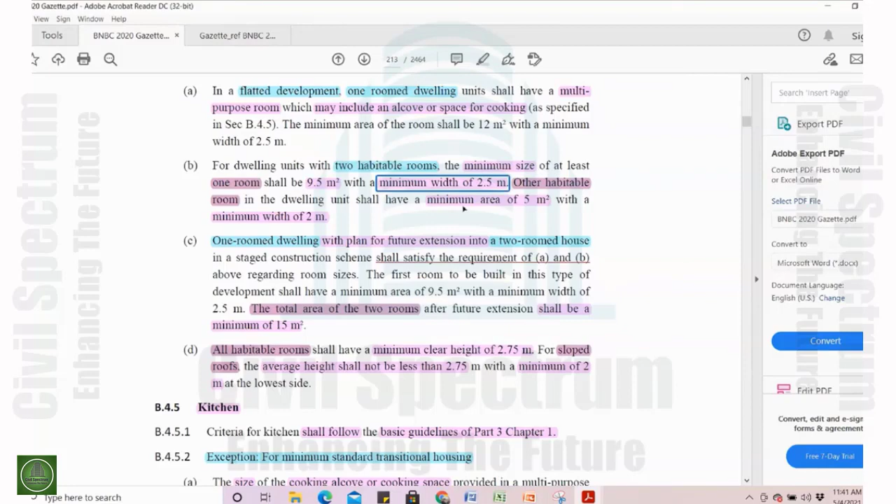For dwellings with 2 habitable rooms, the minimum size of at least one room shall be 9.5 square meter with a minimum width of 2.5 meter. The other habitable room shall have a minimum area of 5 square meter and minimum width of 2 meters.

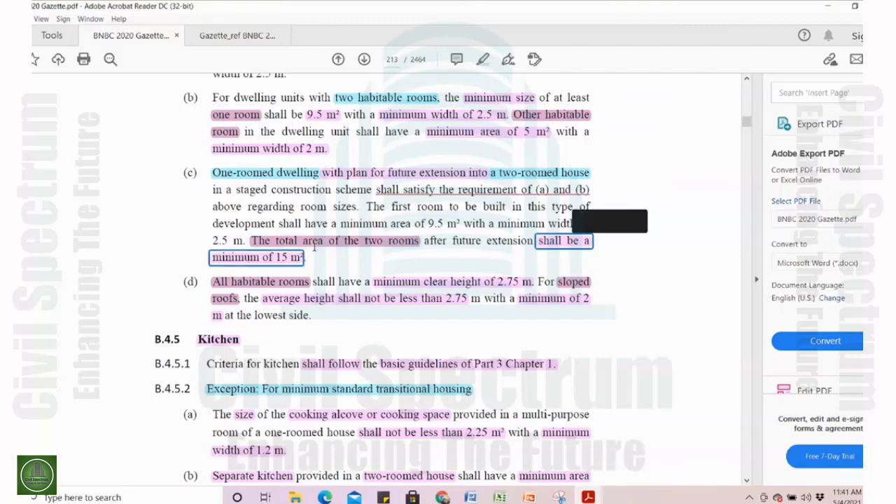One room dwelling with plan for future extension to a two-room house shall satisfy the requirements above regarding room sizes. The first room to be built in this type of development shall have a minimum area of 9.5 square meter with a minimum width of 2.5 meter. The total area of the 2 rooms shall be minimum of 15 square meter.

All habitable rooms shall have a minimum clear height of 2.75 meter. For sloped roofs, the average height shall not be less than 2.75 meter, with a minimum of 2 meter at the lowest side.

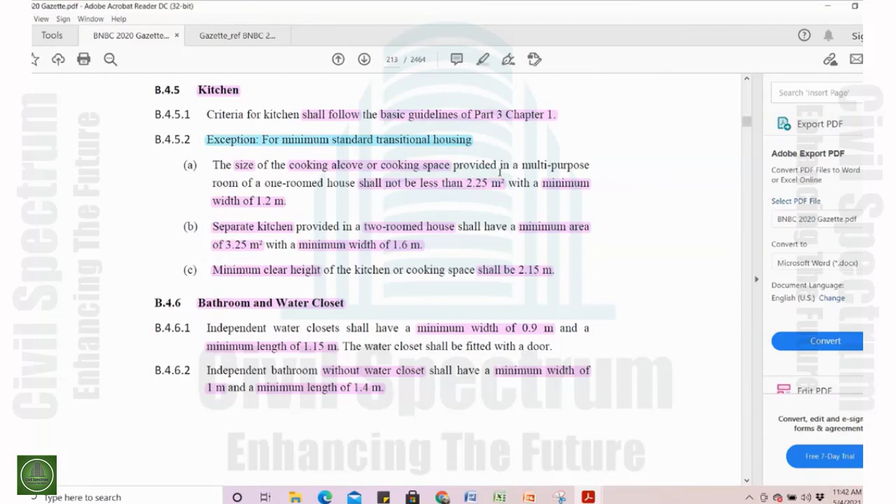So there are guidelines for kitchens. The general guideline will follow Part 3 Chapter 1. There are a few exceptions for minimum standard transitional housing. I am not going into the details of them, but they basically contain 2 types of information: one is the area. So this is the guideline for the kitchen and some exceptions for minimum standard transitional housing.

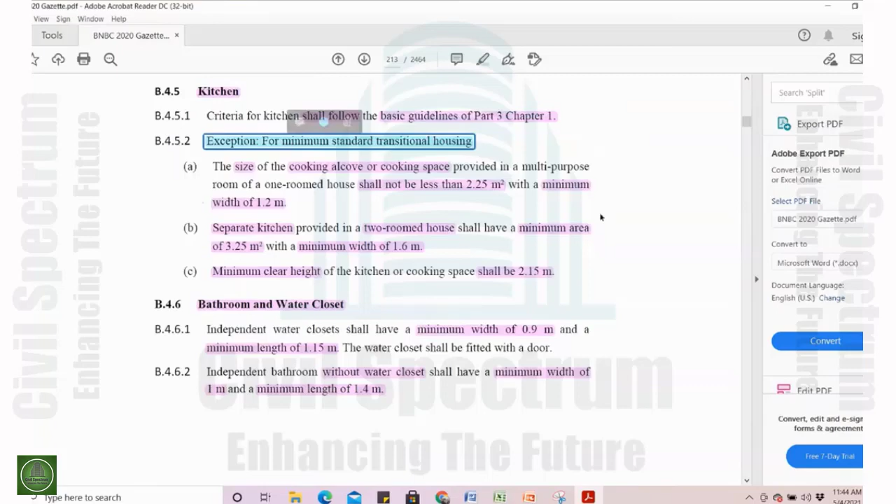There are bathroom and water closet area requirements. These are basically standards containing the area and the minimum width for each of the functionality. So that's more or less similar.

Balcony and corridor: there are a few guidelines for the width and minimum width requirement. For stair, all components are referred to Chapter 1, Part 3, and there are few important issues like water supply.

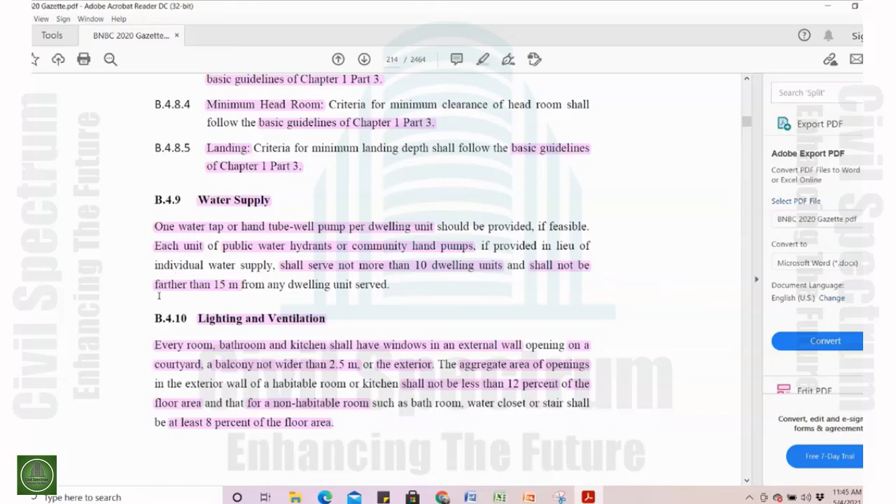Let's go through it. One water tap or hand tube well pump per dwelling unit should be provided if feasible. Each unit of public water hydrants or community hand pumps, if provided in lieu of the individual water supply, shall serve not more than 10 dwelling units and shall not be further than 15 meter from any dwelling unit served. So there can be a shared water resource, but also there are few guidelines about how far they will be located.

Lighting and ventilation: every room, bathroom and kitchen shall have windows in external wall, opening either on a courtyard or a balcony not wider than 2.5 meter, or the exterior.

The aggregate area of the openings in the exterior wall of a habitable room or kitchen shall not be less than 12% of the floor area, and for a non-habitable room such as bathroom, water closet and stair shall be at least 8% of the floor area. That is all about Appendix B, and this is the end of segment 2.

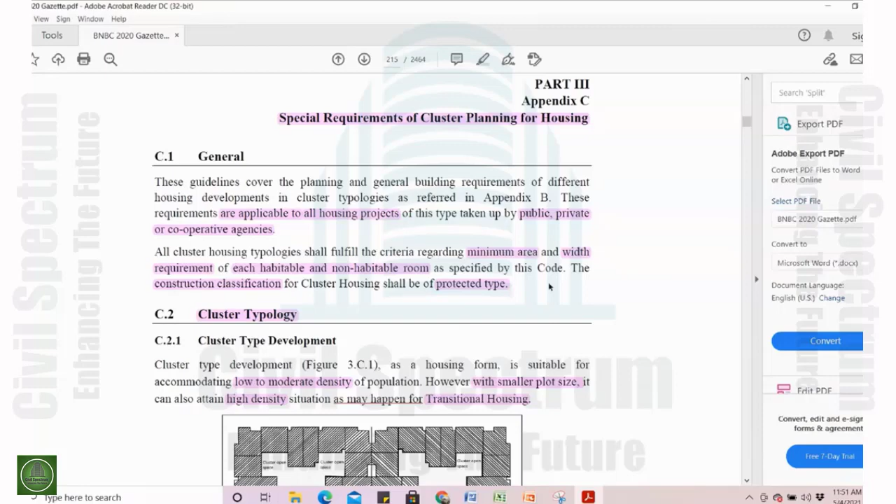Cluster typology is a suitable typology to accommodate low and moderate density housing. With smaller plot size, it can also attain high density, which may happen to transitional housing. This is a general outline of a cluster housing.

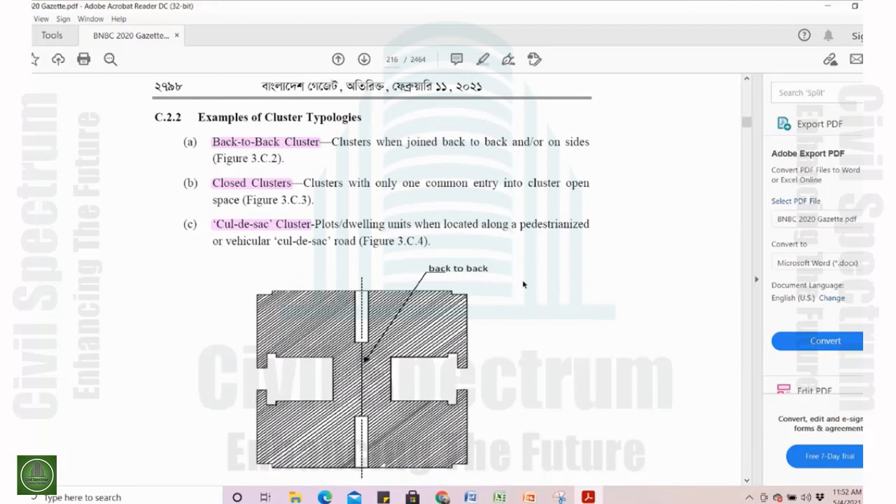There are few typologies described here. Cluster can be back-to-back, closed cluster, cul-de-sac cluster. So there are few diagrams here explaining those clusters, and there are few reference limits as well, like how long the pathway or roadway can be for such developments.

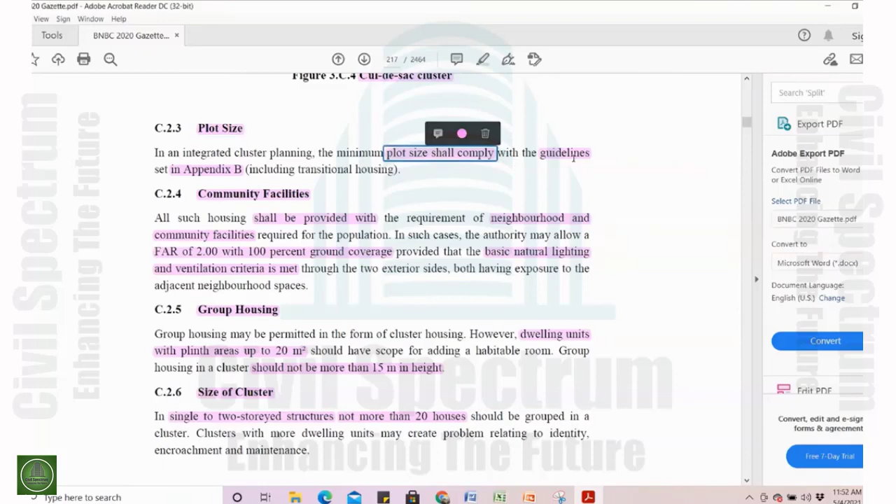Plot size. In an integrated cluster planning, the minimum plot size shall comply with the guidelines of Appendix B. So it refers to Appendix B.

Community facilities shall be provided as per the requirement of neighborhood and community facilities. All housing shall be provided with this. In such cases, the authority may allow FAR of 2 with 100% ground coverage, provided that the basic natural lighting and ventilation criteria is met through the two exterior sides, both having exposure to the adjacent neighborhood spaces.

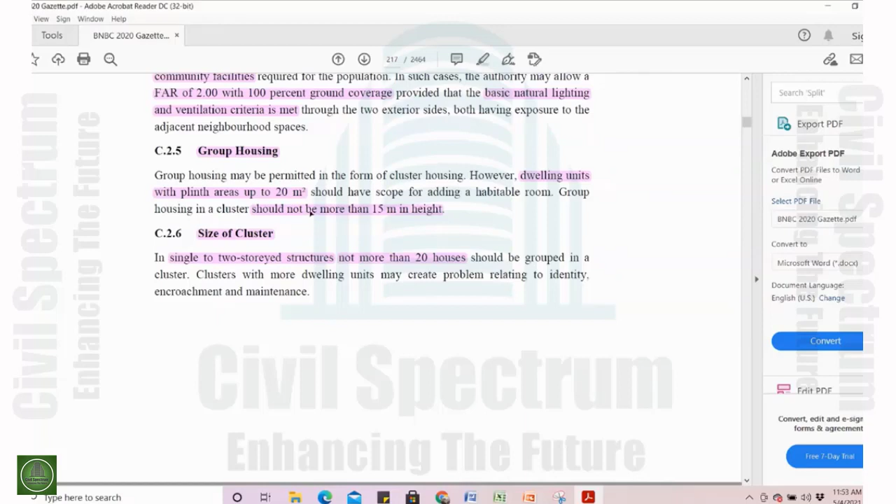Group housing may be permitted in the form of cluster housing. However, dwelling units with plinth areas up to 20 square meter should have scope for adding habitable rooms. Group housing in a cluster should not be more than 15 meter in height. So there is a height limit.

Size of cluster: single to two stories, not more than 20 houses in this kind of development should be grouped in a cluster. That is the basic module of a cluster that is suggested here. Cluster with more dwelling units may create problems relating to identity, encroachment, and maintenance. So this is the primary reference for the size of the cluster.

Size of the cluster open space: minimum dimension of width shall not be less than 6 meter or 3/4 of the height of the building, whichever is higher. The area shall not be less than 36 square meter. Group housing around a cluster open space should not be more than 15 meter in height.

Setbacks: for cluster type development, at least two sides of each individual dwelling shall have exterior walls and openings. No setback is required on the other two sides for such development. However, for compliance of natural lighting and ventilation with this code, light well and ventilation well may be used within the cluster plot.

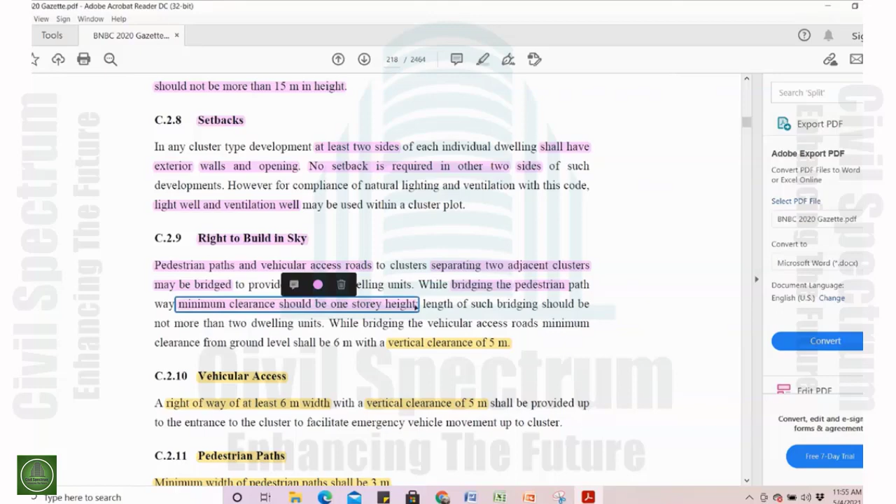While bridging the pedestrian path, a minimum clearance should be 1 story height, and the vertical clearance will be 5 meter. For vehicular access, the right of way will be 6 meter width and the vertical clearance height will be 5 meter. Pedestrian paths minimum width will be 3 meters.

Width between two clusters: built area of dwelling unit within cluster shall have no setbacks from the path or road, and the pathway will be minimum 3 meter and the vehicular road will be minimum 6 meter wide.

Density: transitional housing shall result in higher densities with low-rise structures. For a minimum standard housing with 1 habitable room, 1 kitchen, 1 two-fixture toilet, the required enclosure walls, as per provision of this code, a minimum dwelling unit of 23.8 square meter is required for a cluster type. However, in transitional housing, the size of the dwelling may be reduced up to 18.5 square meter.

So there is a density guideline in Appendix B that must be followed also.

Group toilet for transitional housing. There is a provision of group toilets. Transitional housing may have group toilets at the rate of 1 water closet, 1 bath and washing place, and a washing place in 3 separate chambers. This is important because they cannot be located in one single chamber or 2 chambers. There must be 3 separate facilities per 3 families.

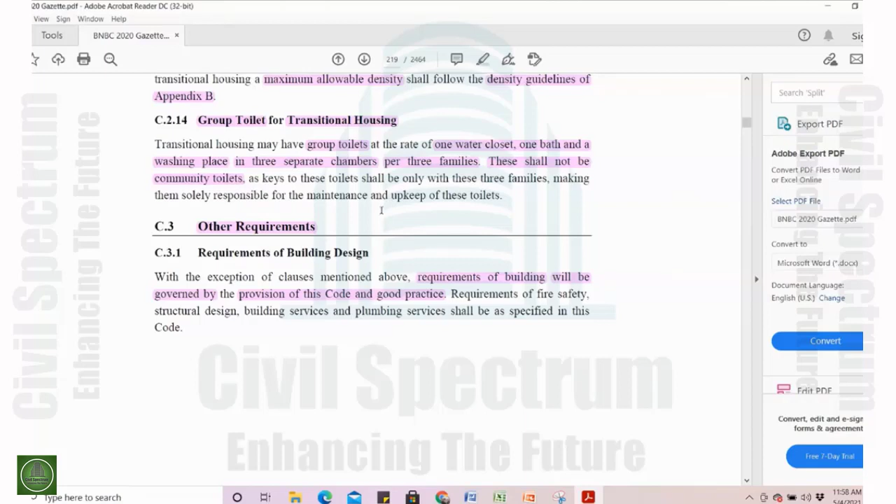So the service infrastructure can be shared, but it has certain guidelines or criteria to meet. Other requirements of the building will be governed by the other codes, parts and chapters of this code, and by good practice.

So this segment, sorry, not the third segment, the Appendix C, and we have the final Appendix E to cover. Let's go for Appendix E directly, since we have a very shortage of time. So this is Appendix E.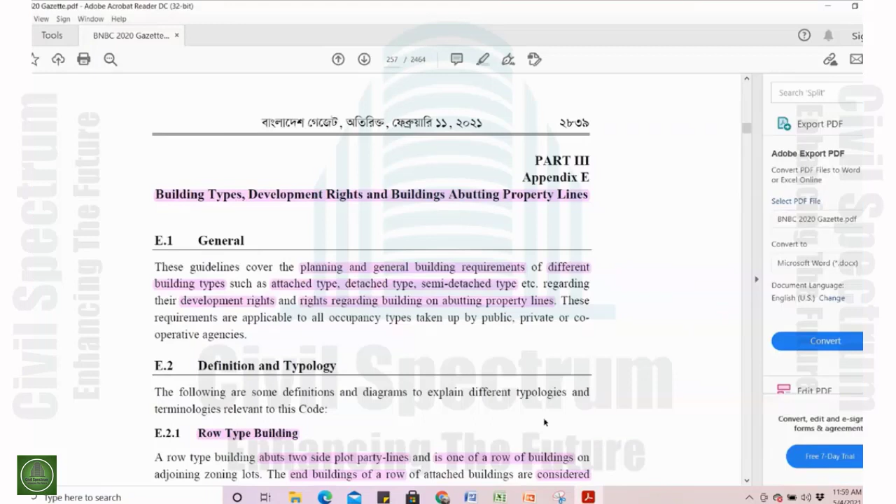Generally, the Appendix E has 4 sections, and the details of which are like this, and the references are like this. So let's go for the appendix in detail. It is about building types, development rights, and buildings abutting property lines.

These guidelines cover the planning and general building requirements of different building types, such as attached type, detached type, semi-detached type, etc., regarding the development rights and right regarding building on abutting property lines.

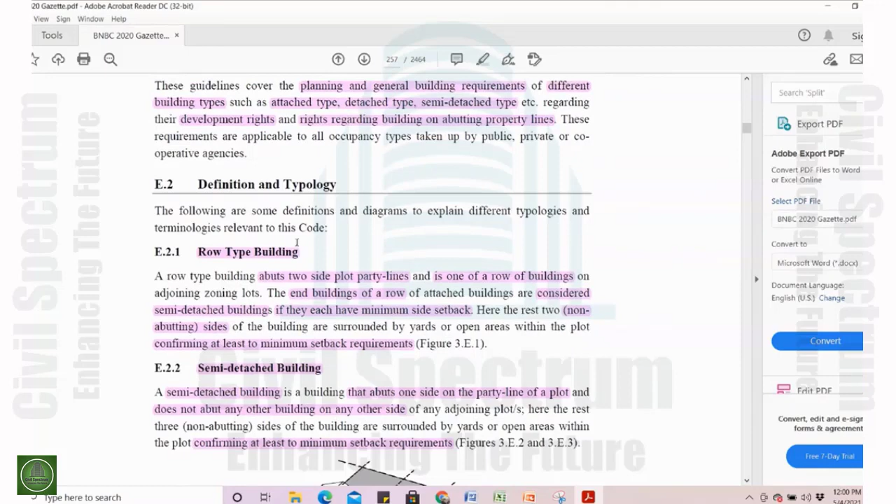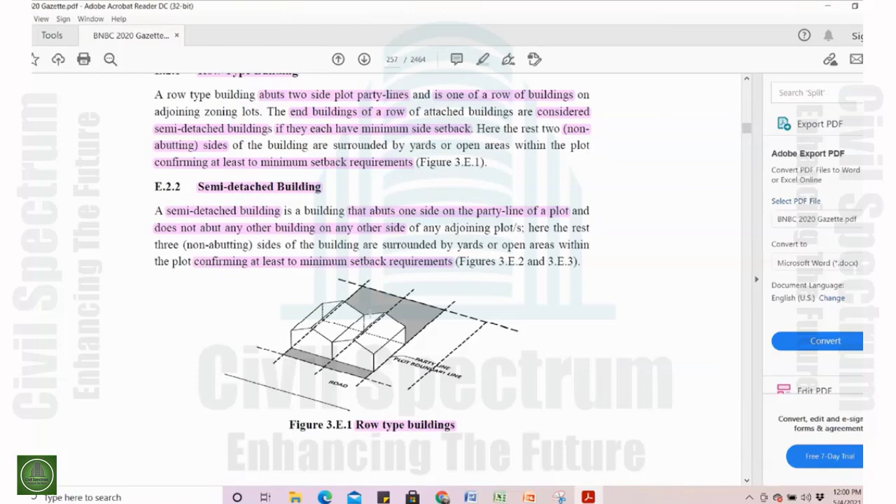So this is the general orientation, definition and typologies. There are a few types here: row type of building, semi-detached building, detached building. We can go through the diagrams and have an idea quickly. Row type has walls abutting the property line and 2 sides open within the plot, maintaining the setbacks. Let us go to the definition.

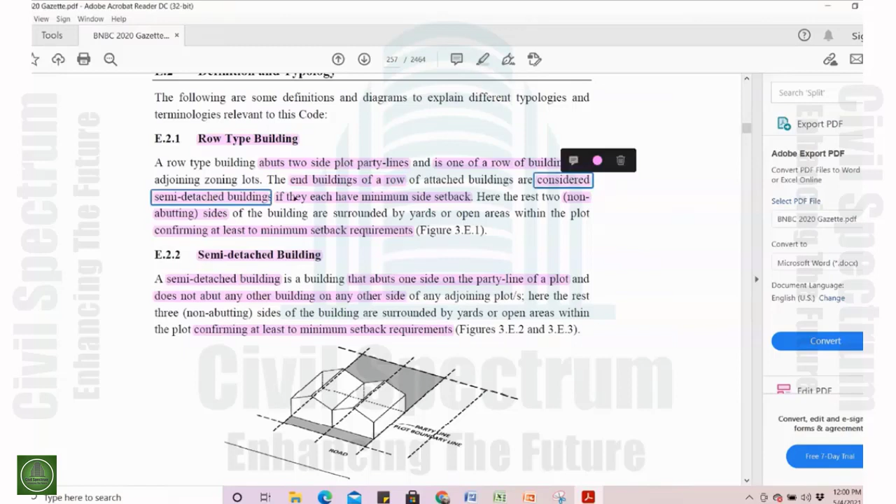A row type building abuts two side plot party lines and is one of a row of buildings on adjoining lots. So it is not a single independent development, it is a development of a series of building activity. The end buildings of a row of attached buildings are considered semi-detached buildings if they each have minimum side setbacks. So at the end of the row, how it will end has a clue here. The rest two sides of the building are surrounded by yards or open spaces within the plot, conforming to minimum setback requirements.

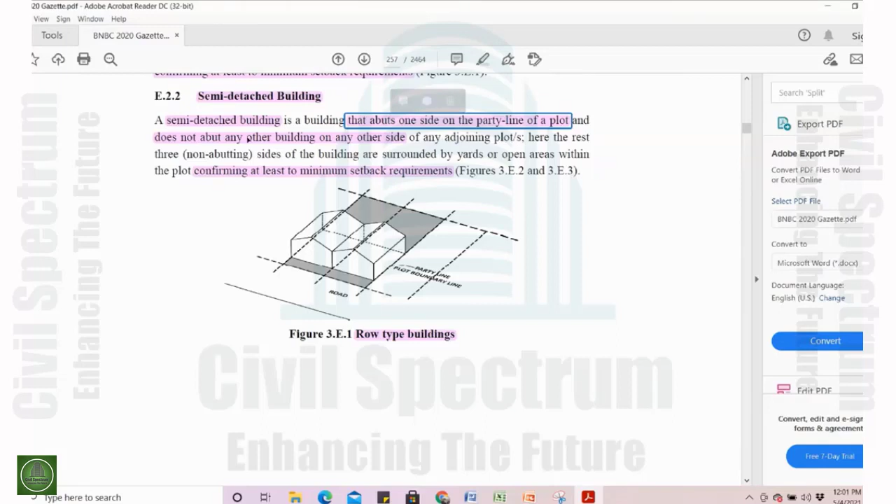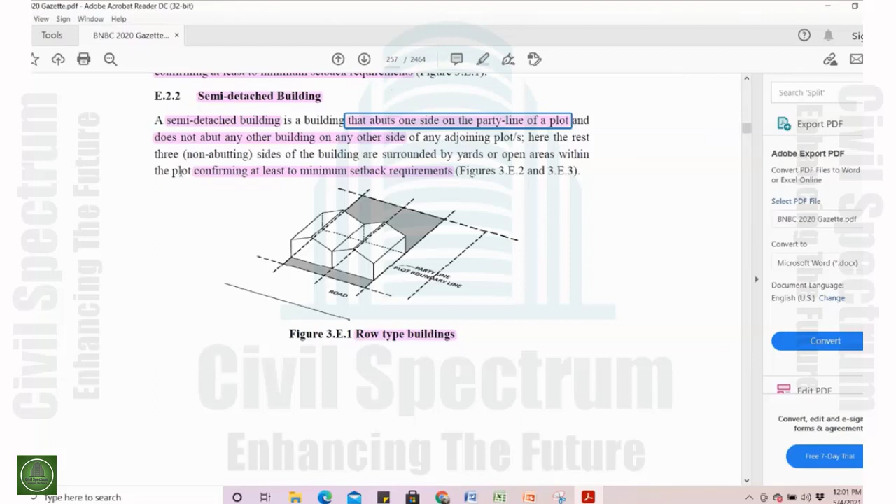Semi-detached building: a semi-detached building is a building that abuts one side on the party-line of a plot and does not abut any other building on any other side of any adjoining plots. Here the rest three non-abutting sides of the building are surrounded by yards and open areas within the plot, conforming at least to minimum setback requirements. So it can be of two types: one is not abutting neighboring building, so they are all independent, and this is also a valid option; or they can even share one wall. So this creates two types of opportunities.

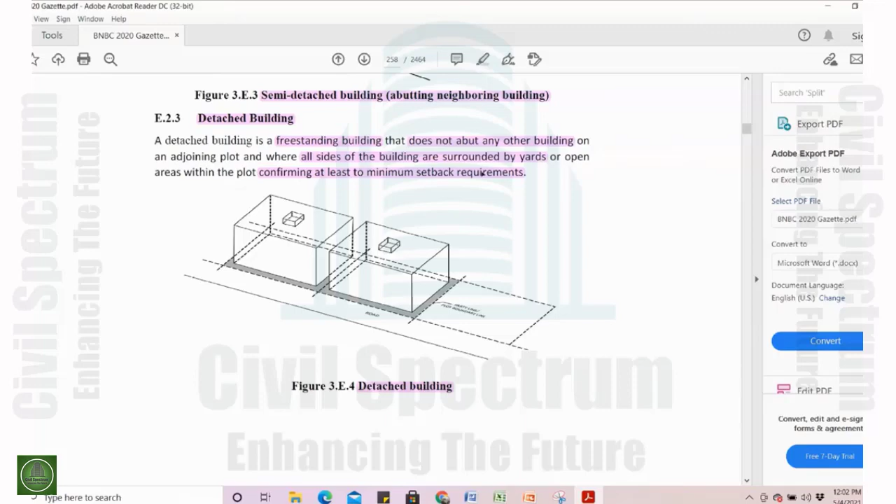A detached building is a freestanding building that doesn't abut any other building. All sides of the building are surrounded by yards or open spaces conforming at least to the minimum setback requirement. So this is the detached building.

Some special provisions are there for constructing walls abutting a party line, because when two owners build on the same property line, there are situations that have to be addressed. Walls abutting any party line shall have no opening, shall not contain any concealed lines like water, gas, sanitary, or electricity, and shall be so constructed that it remains moisture free, leak proof, and conforms to fire safety requirements. A party wall shall conform with structural guidelines for earthquake and pounding gaps as referred in Part 6. When designed separately, pounding gaps are mandatory; when designed and built in an integrated way in the same project, no such gap is required.

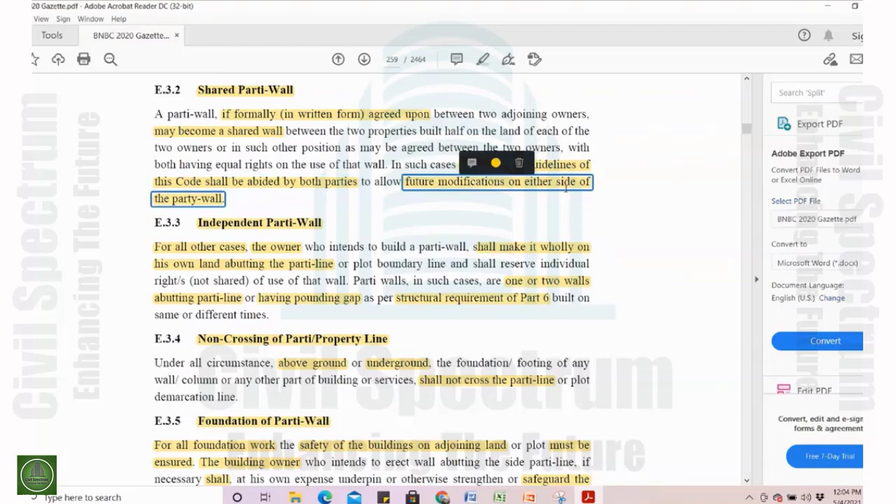Party walls can be shared or independent. If there is a shared party wall, formally agreed upon in written form between two adjoining owners, it may become a shared wall between the two properties, built half on the land of each of the two owners, or in such other position as may be agreed upon, with both having equal rights to use of that wall. In such cases, the structural guidelines of the code shall be abided by both parties to allow future modifications on either side of the party wall.

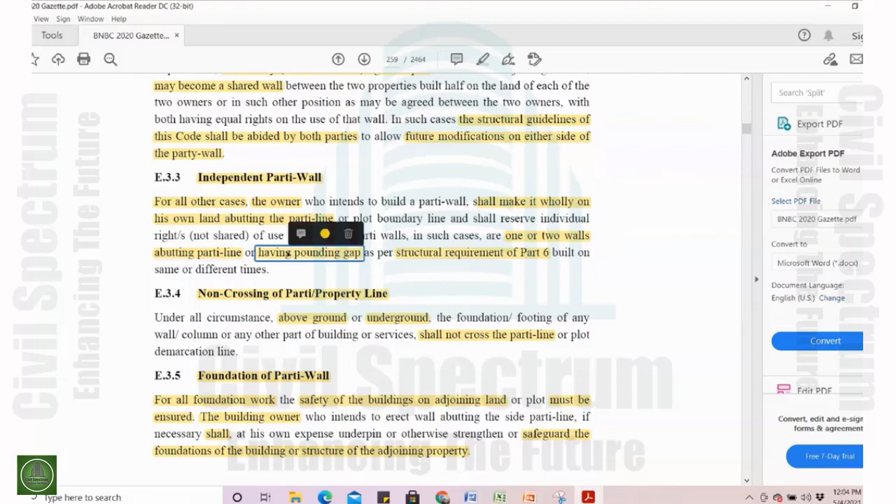Independent party wall. For all other cases, the owner who intends to build the party wall shall make it wholly on his own land abutting the party line. In such cases, walls abutting the party line shall have...

Walls abutting party line shall have pounding gaps as per structural requirements of part 6. Non-crossing of party or property line: under all circumstances, above ground or underground, no component can cross the party line or plot demarcation line.

Foundation of party wall: for foundation work, the safety of the buildings on adjoining land must be ensured because it is built on the party line. So the adjacent building or the land must be secured.

The building owner who intends to erect a wall abutting the side party line, if necessary, shall at his own expense underpin or otherwise strengthen or safeguard the foundations of the buildings or structures of the adjoining property.

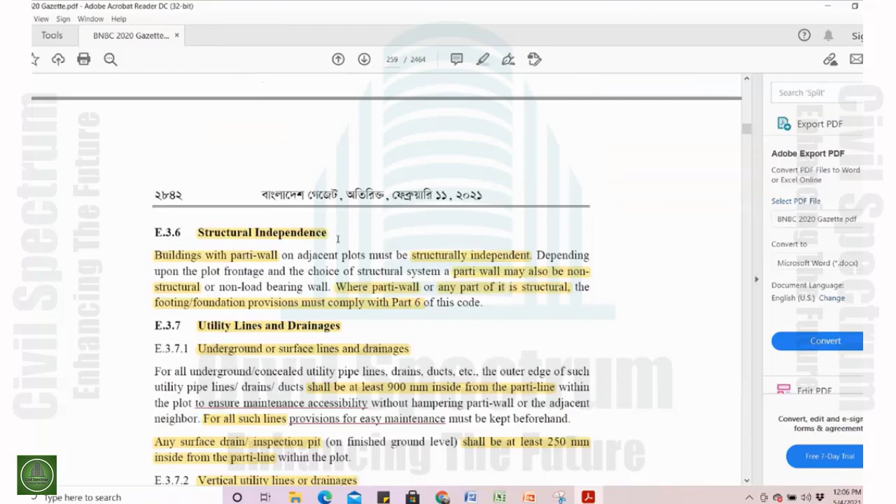Structural independence: buildings with party wall on adjacent plots must be structurally independent. Depending upon the plot frontage and choice of structural system, a party wall may also be non-structural or non-load bearing, where the party wall or any part of it is structural. The footing foundation provisions must comply with Part 6.

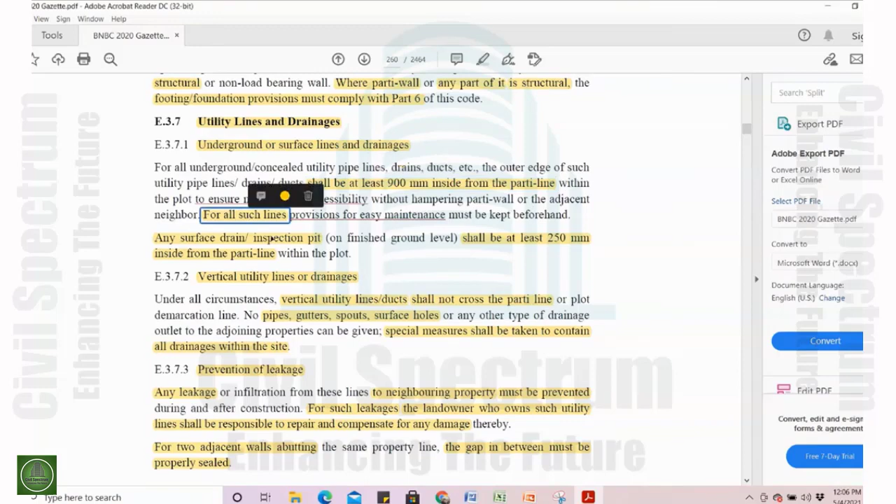Utility lines and drainages, underground and surface lines: for all underground concealed pipelines, drains, ducts, etc., the outer edge of such utility pipes, lines, drains, ducts shall be at least 900 millimeter inside from the party line. For all such lines, any surface drain or inspection pit shall be at least 250 millimeter inside from the party line.

Vertical utility lines and drainages: vertical utility lines, ducts shall not cross the party line. No pipe, gutters, spouts, surface holes, or any other type of drainage outlets to the adjoining property can be given. Special measures shall be taken to contain all drainages within the site.

Prevention of leakage: any leakage to neighboring property must be prevented. For such leakages, the landowner who owns such utility lines shall be responsible to repair and compensate for any damage thereby. For two adjacent walls abutting in the same property line, the gap in between must be properly sealed.

Other requirements: all other requirements will be governed by the provisions of this code and good practice. Measures must be taken for prevention of infiltration of rain, dust and moisture through joineries of party walls. Damp proofing and termite proofing treatment will also be there as per provisions of Part 6. Chemical treatment to prevent long-term growth of fungi and other microbial forms is recommended on such walls.